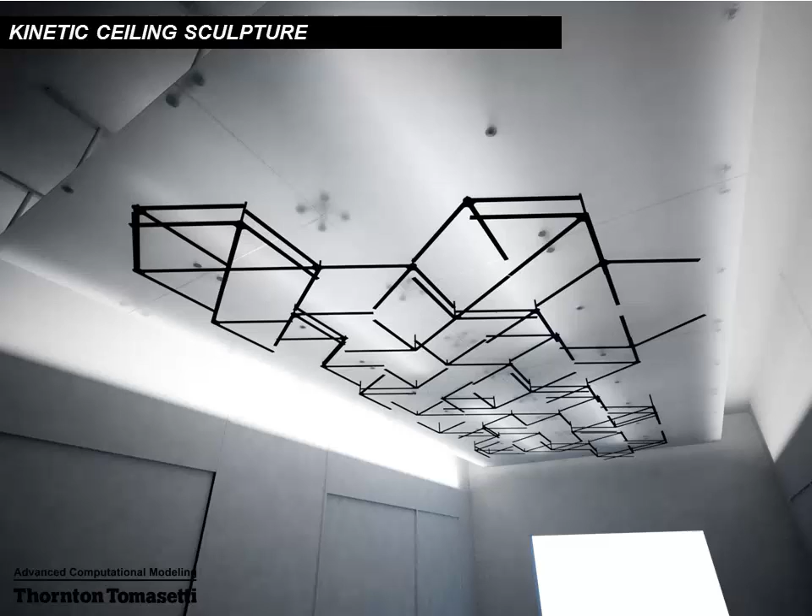I just got back from San Francisco this morning - we opened a new office there. We have our office opening party next week, and in the elevator lobby we installed a new ceiling sculpture that me and a colleague of mine, Justin Adone, who used to work in Chicago as well, designed and built in the last few days. This is a rendering, and this was last night when we had finally installed all the panels.

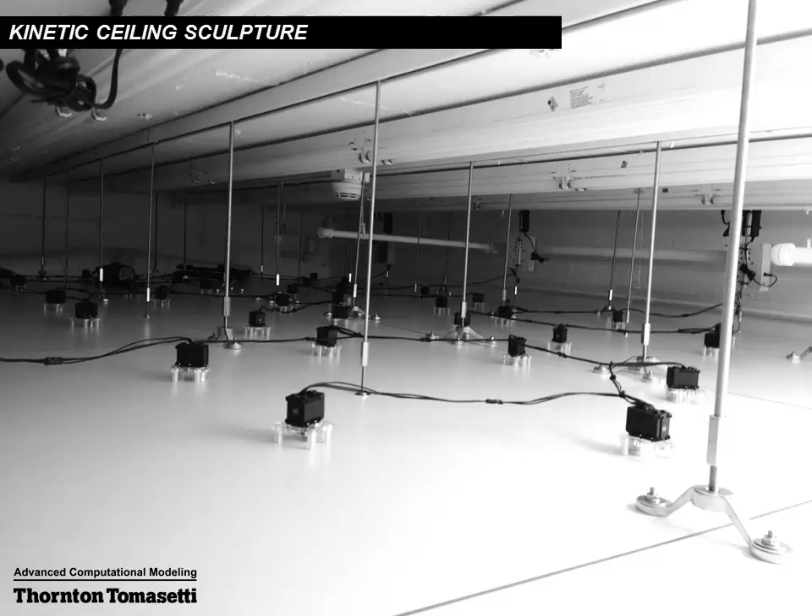It's pretty cool because it's a kinetic sculpture. We have these little arrays of servos sitting on top of the ceiling, reacting to people walking underneath and forming nice patterns when it's static or empty, but responding with chaos when people walk underneath. I haven't actually seen it work yet since I had to leave this morning early, but Justin uploaded the software after I left, so let's see how it turns out.

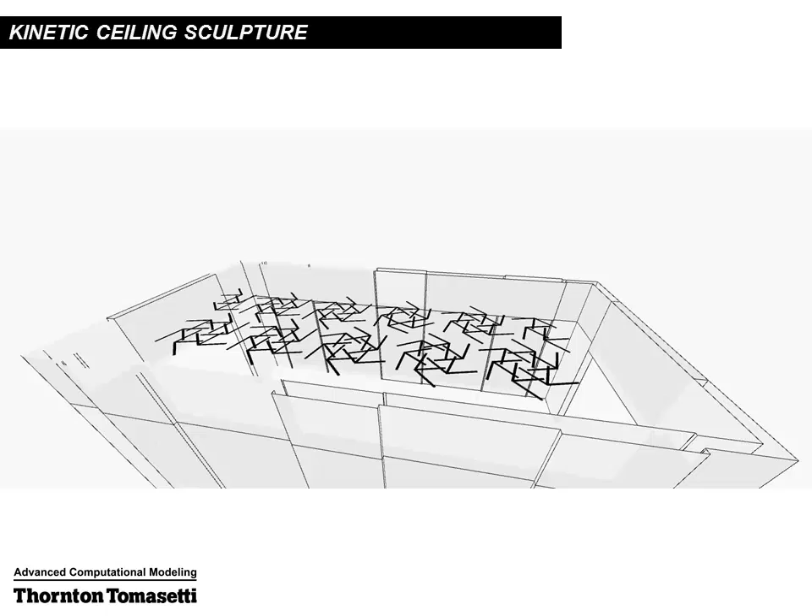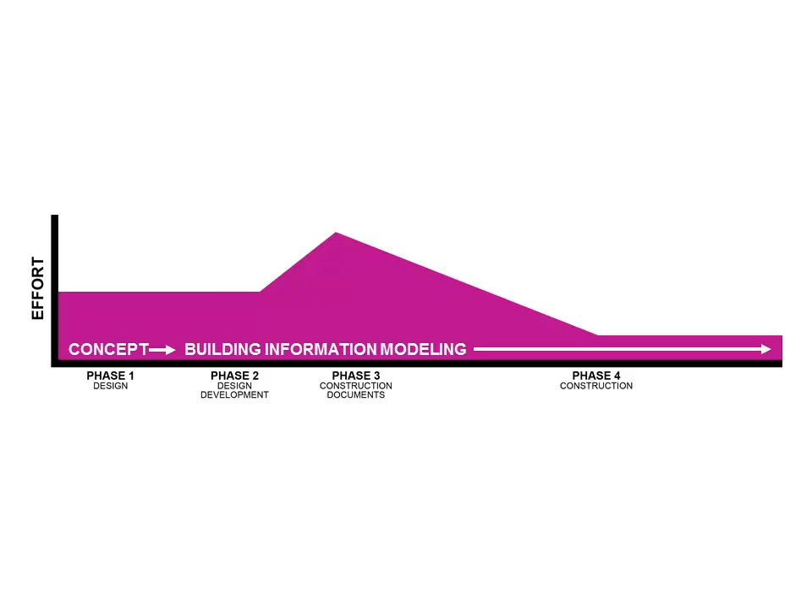ACM - the reason we started our group was because, as I mentioned with construction support services, we've been working a lot towards the later phases of the project. We've been really good with BIM and BIM to fabrication. But our focus is really to try and connect more with the architect at the schematic design phase, using smart computational tools and smart workflows to embed as much of our engineering knowledge into the design as early as possible.

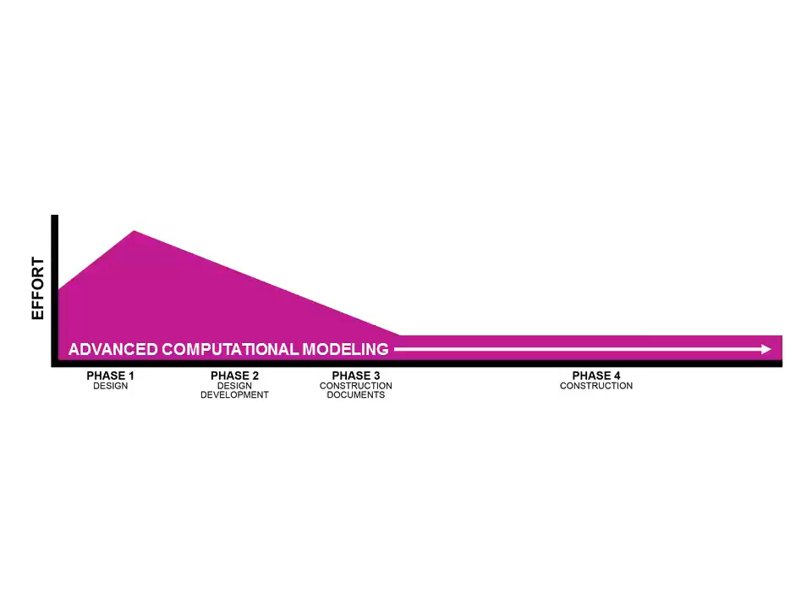I'll show one or two examples of what that means. This is the Culture Shed in the Hudson Yards area in New York. Diller Scofidio is designing this, and we are the structural as well as the facade engineers. It's essentially one big super truss, about 17 stories tall, with very large ETFE pillows - they're actually going to be the world's largest ETFE pillows when finished. This is a kinetic structure that moves, and the doors will open dynamically so it can transform into different kinds of exhibition spaces.

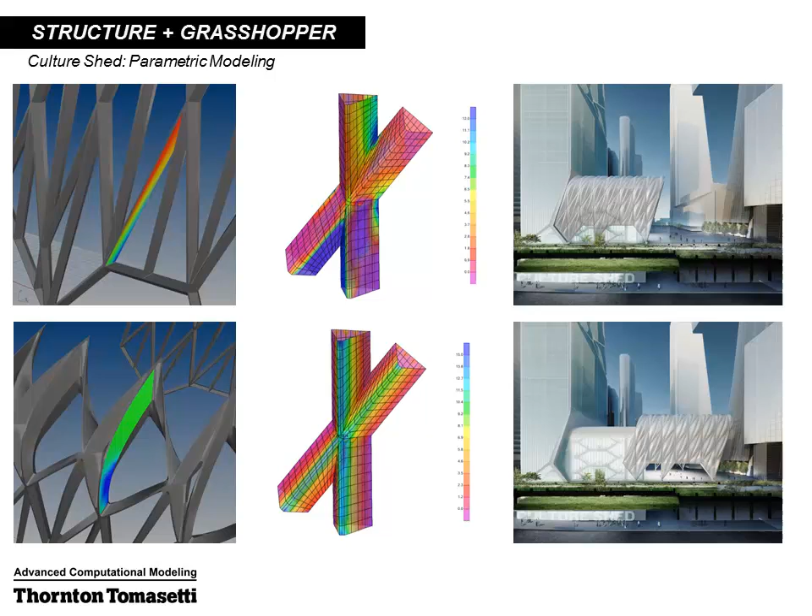And pretty early on, we were involved, kind of helping our structural engineers to maybe figure out some of the geometry, and just looking at steel warpage criteria and understanding, starting to talk to fabricators and understanding at what point does it get really expensive to fabricate this kind of steel, and how should we modify the geometry in order to avoid that. And then a lot of what our engineers are doing is already at the schematic design phase, running some finite element studies to understand the node forces, etc.

So there was this one point when we realized that the steel was too bent and it was going to be too expensive to fabricate. So we went back to the drawing board and over the course of a week just came up with all these different variations of that one idea of just using planar elements. So something like that, for example.

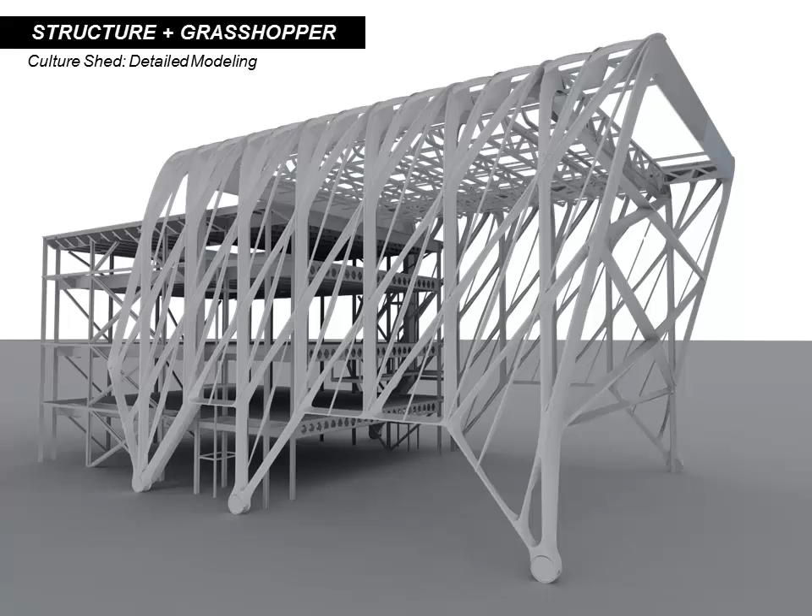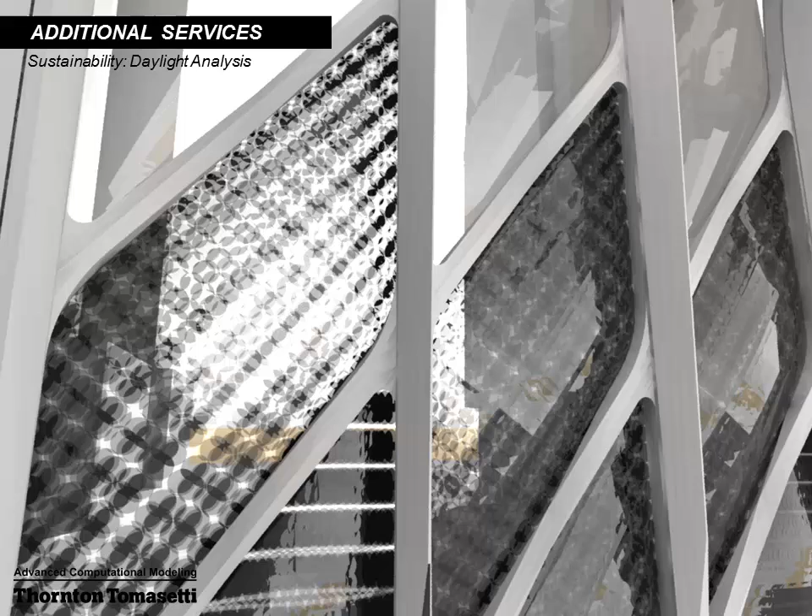So here, you can see we're also designing the kinetic structure itself. We actually hired somebody who used to work for a bridge design company, kind of specifically to do this. And as we're designing the structure, and this is really, I think, where maybe our group comes in handy in our firm, we're also designing the facade, and we're also designing the sustainability, kind of the facade frit pattern of this building.

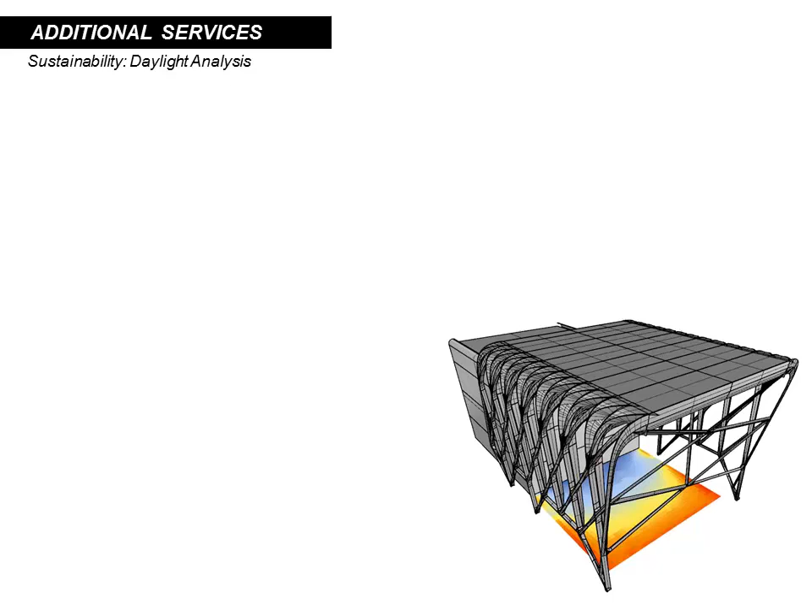So obviously, this being a translucent facade, there's going to be far too much heat gain, and so the architects were kind of interested in having a frit pattern limit some of the radiation falling into the space. So we used some of the tools that Mustafa will show in detail a bit later on, Ladybug and Honeybee, to understand how to design the frit pattern in order to limit the amount of radiation and still have a good amount of daylight falling into the space.

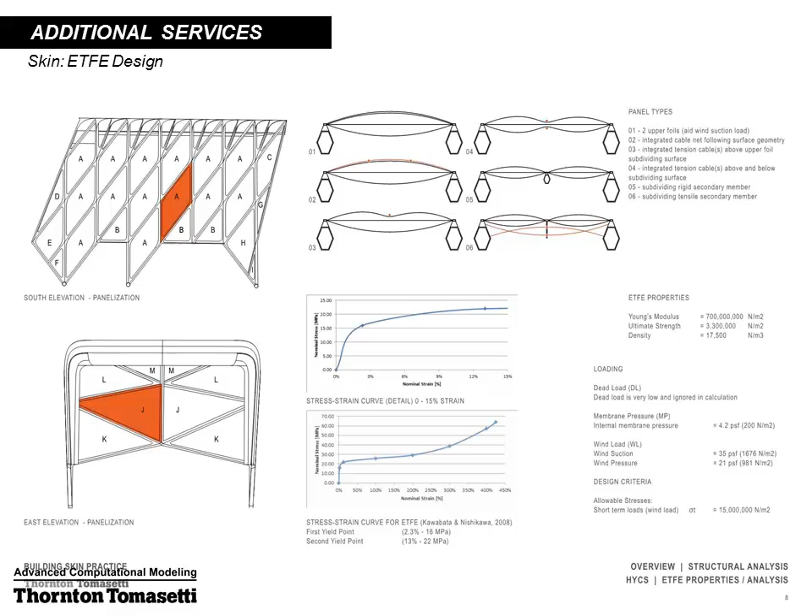And as I mentioned, as we're doing that, we're also designing the actual fabric itself. So it's a really interesting project from that perspective. It's kind of looking into fabrication of the steel, as well as frit pattern design, as well as kind of fabric design, just to give you an idea.

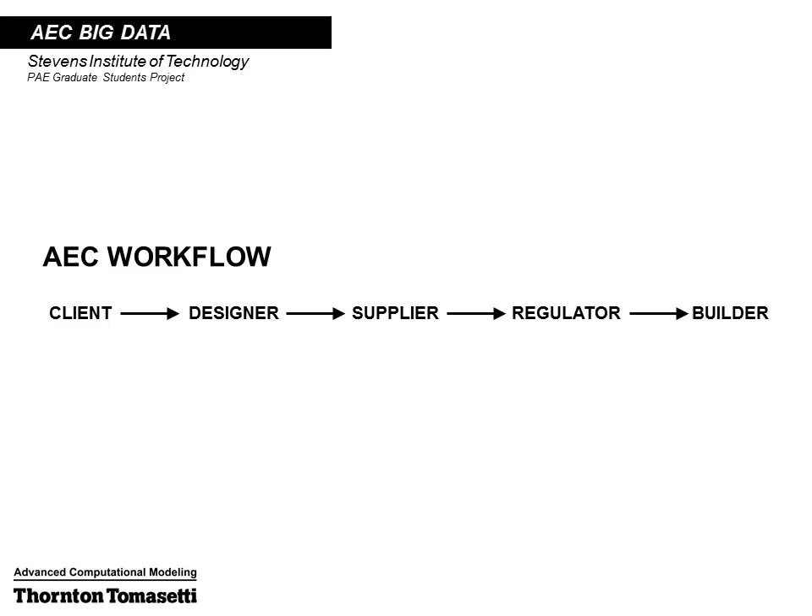And other than that, we're really kind of always looking at strategizing and optimizing workflows. So I want to show this - I don't usually show this, but this was some research that we did when we taught a class about a year ago at Stevens Institute in New Jersey with a friend of mine, Gregor Wilkner.

And the idea was, the problem statement for the students was: imagine we're in the future right now, it's like 2070 or so, 50 years from now, and we're running out of land to build on, so we're starting to build cities in the water, and we build these big floating pods. As the population grows, the demand for energy grows, and we need to build more energy plants on demand.

This was just a class concept, and we taught a lot of programming in this. And so we set up this kind of automated database in the cloud where we said, okay, what if the mayor would automatically request proposals and say, hey, we're reaching capacity, we're 80% full now with our demand, and we need more power plants.

And then that automated request would then just call a web hosted, or like a server hosted - in this case, we were using Grasshopper, just kind of a Grasshopper script that said, okay, I'm going to come up - every student would then just come up with a different way of designing these solar plants, and then it would upload all the designs.

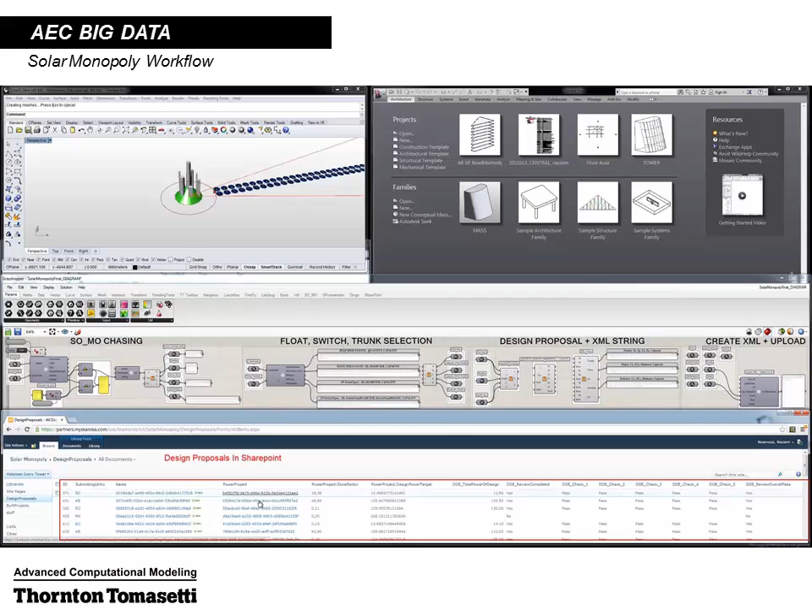Anyway, it was pretty difficult to show this in a video, but basically we did this on top of SharePoint, and basically all these different instances are talking to the same SharePoint database, kind of independently of one another. I'll skip this point.

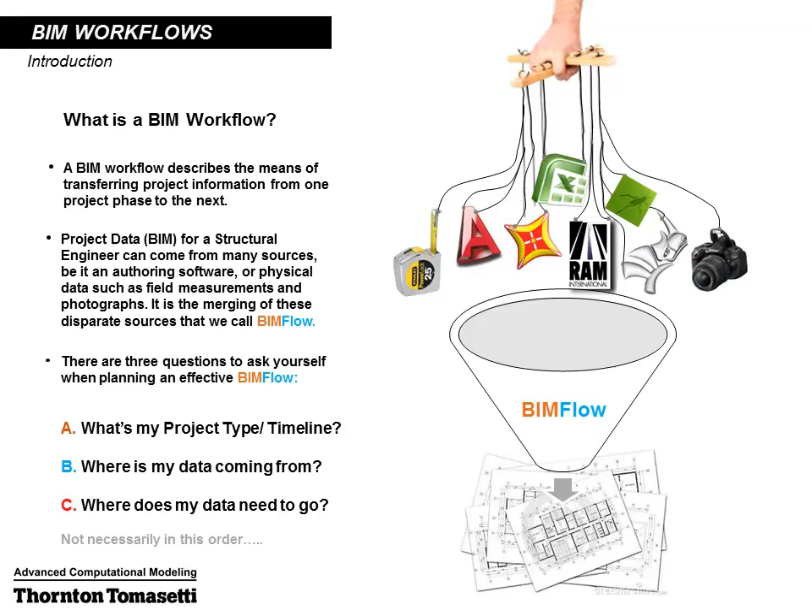So internally looking at BIM workflows, when people talk about BIM, they always just talk about Revit. We really think it's not just Revit - it can be any kind of information, really. It can be site photographs or hand sketches, or a lot of engineers use Excel.

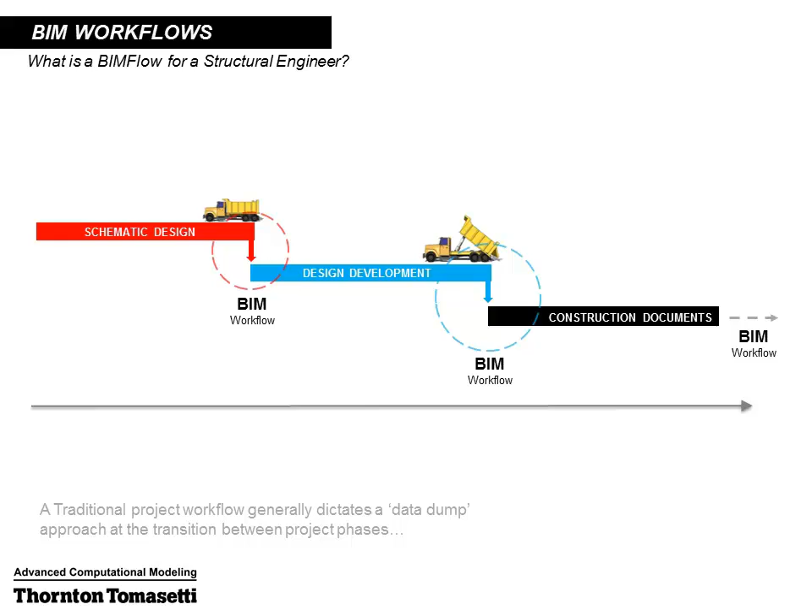So the typical project timeline is we go from SD to DD to CD, and typically what happens is there's always a problem at these intersections. We work until we have 5 sleepless nights before the deadline, and then we produce all this data and just dump it there and don't look at it again. A month later we pick up again from scratch and do that same thing again. So this is the effort curve where it's work like crazy, and then we don't touch it anymore until much later.

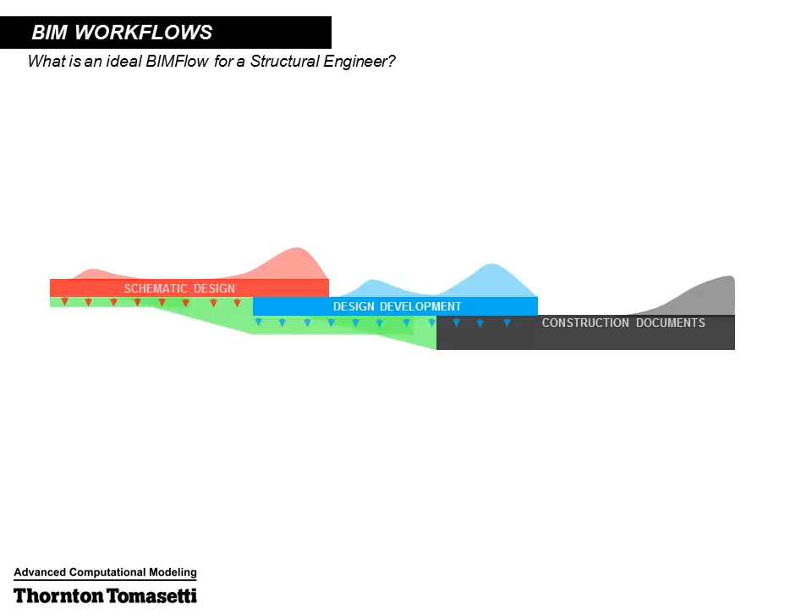In an ideal world, this would be a lot more linked, where all the information that we start to produce will just grow over time into this holistic database. If we just look at one phase at a time, design development for example, the ideal workflow would be fairly linear for us as engineers - the architect gives us geometry, or we generate the geometry, then we analyze it, and then we document it.

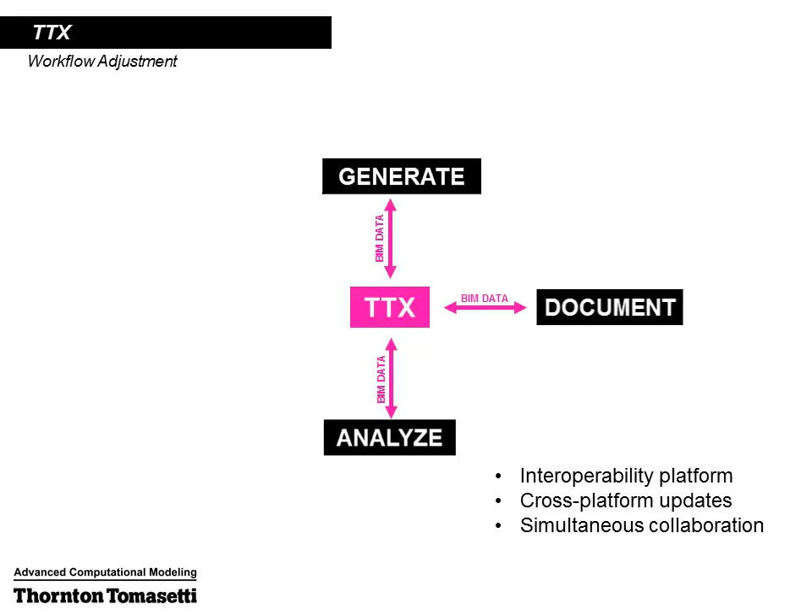So we don't like to treat this in a linear fashion. We like to think of this more as having a central independent file format. We call it TTX - we came up with our own. It's kind of, I want to say a lighter version of IFC, but it's pretty different actually. The idea is that we can talk to it from our 6 main structural analysis programs that we use.

So Grasshopper and Revit are in the mix, as well as Tekla for fabrication, and then also RAM, ETABS, and SAP currently for analysis. The idea is that you can start a project somewhere, then update the database, then read it somewhere else, make changes, and then update the database again, and update the first project.

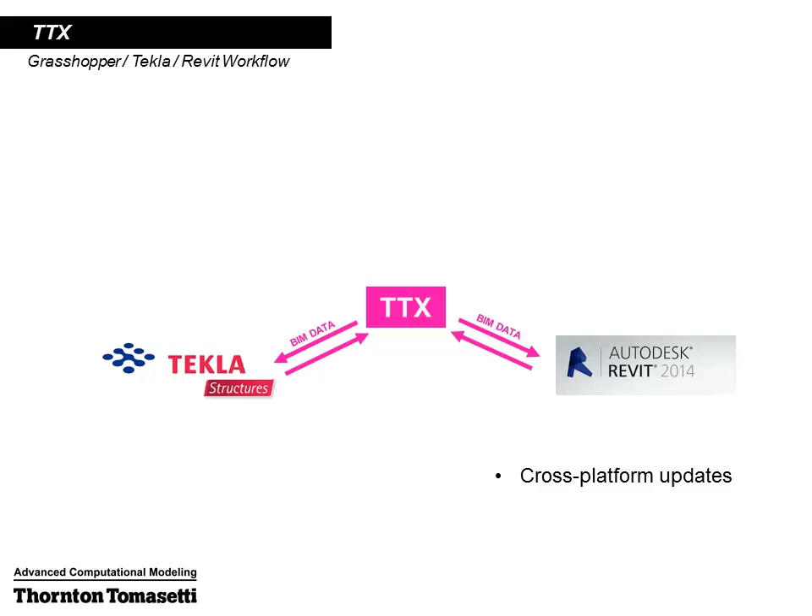So here we have a simple model in Revit, and we push it over into Tekla, going through TTX, and then in Tekla we make some changes, we add some elements, and then we can update the database again and later the model. It basically keeps track of the elements that have been added, removed, or changed, which is really powerful.

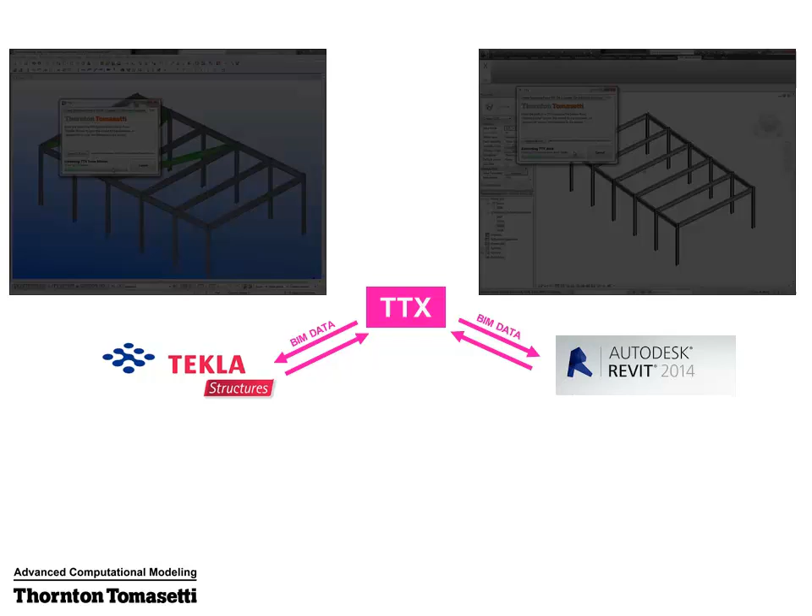So I think for the longest time we've always just had these one-way dumps of information going from one software to another. But then once you make a change, you can't update it anymore.

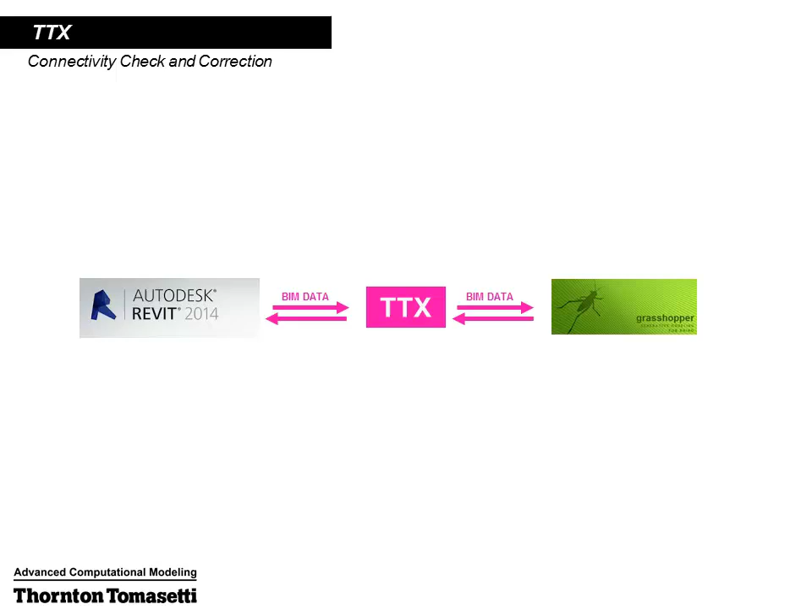So another piece of the workflow is where maybe we start something in Revit. In Revit, in most of these tools now, we have this kind of connectivity checking tool. The model may look good just the way the BIM modeler built it, but if you wanted to create a fabrication model or an analysis model from it, we would realize if we run it through this checking tool that some of the nodes are disconnected.

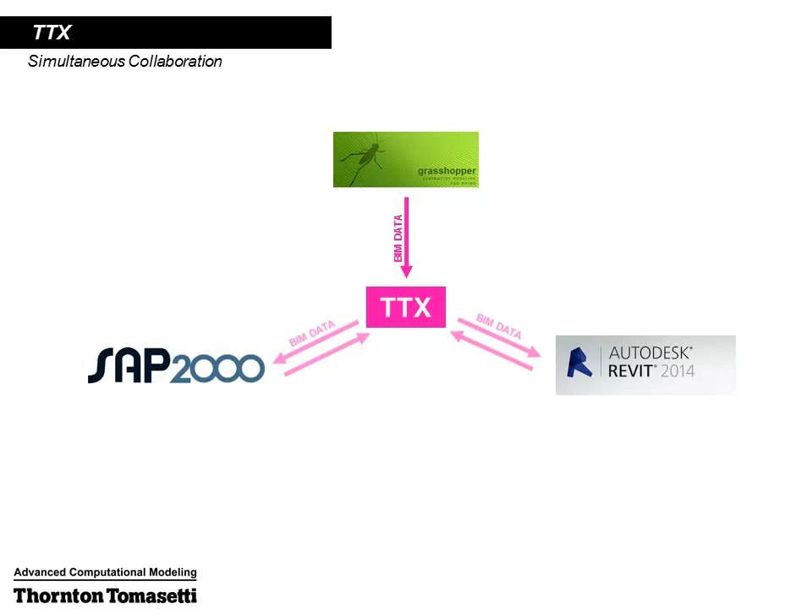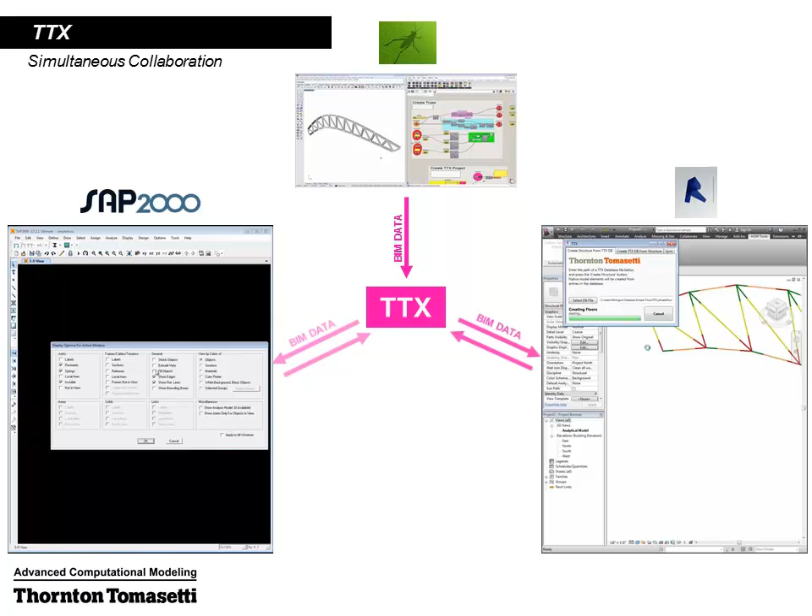And another example is where we start a model in one software, and then you go into 2 different packages in parallel and you do your thing, and then later on you sync them up again.

So in this case, we started a truss in Grasshopper, and then we pushed it through TTX into Revit and SAP. While we are laying out the documentation, the drawings and all the views, setting up all the sheets with the different tags inside of Revit, we're actually running the calculations and sizing all the elements, the real sizes, in SAP. So these were just dummy sizes when we brought it in from Grasshopper.

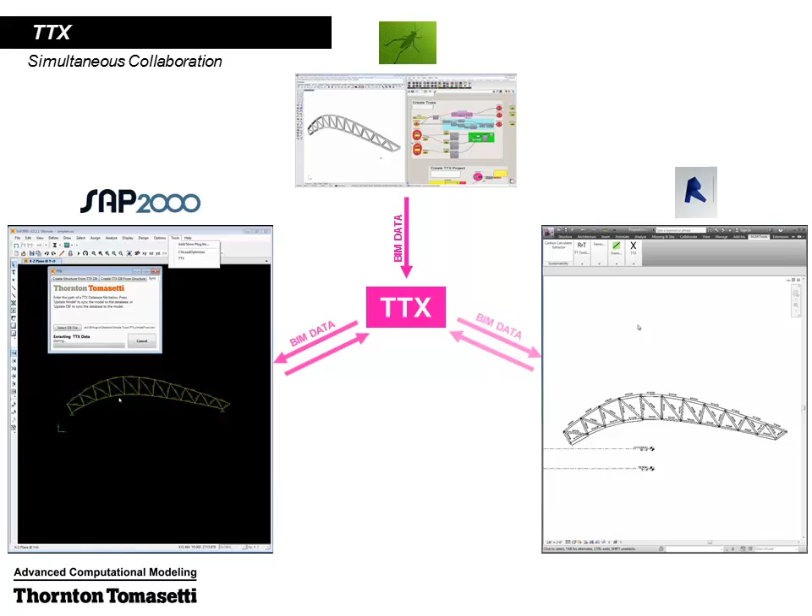The nice thing is that you can then later on just update the drawing. All the downstream information that is tagged onto the model, in this case the views and the tags, will update once the model updates. That's really powerful because it means we can take the documentation set and we don't have to redo it over and over just because something changed in the design process.

For the guys at Case, I'm sorry to bore you, I showed this already at Autodesk University. We were talking earlier that there has to be something new in this presentation since two months ago.

So two months ago, we also introduced the idea of TTX apps.

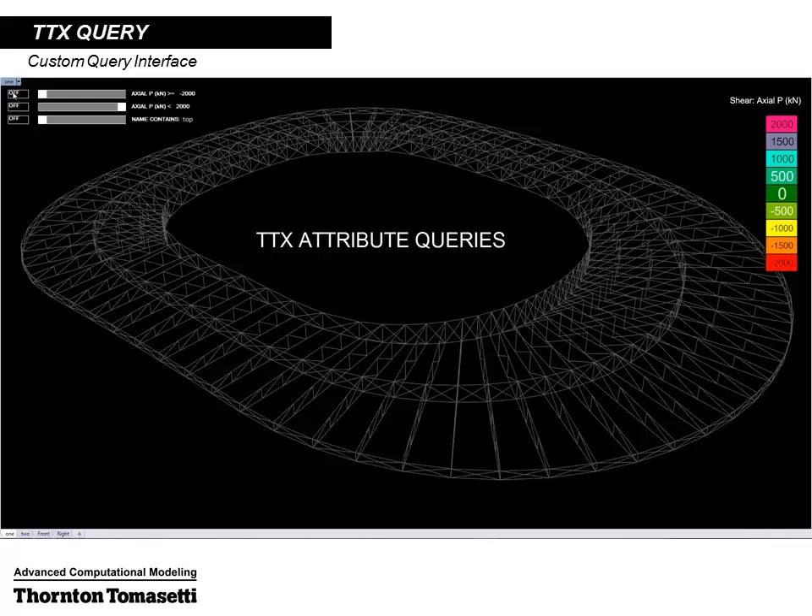So the nice thing about TTX is that it's built in a database. That means we can just keep growing it over time. As we are growing it over time, we can keep track of what happened in the past and what happens next. Also what's really nice is that it's not just a geometric or BIM database, but we also are actually transferring analysis data.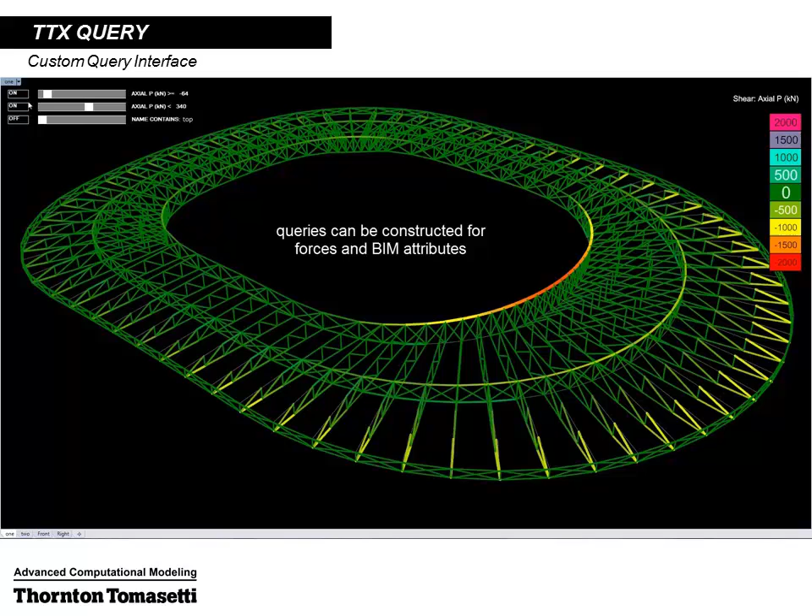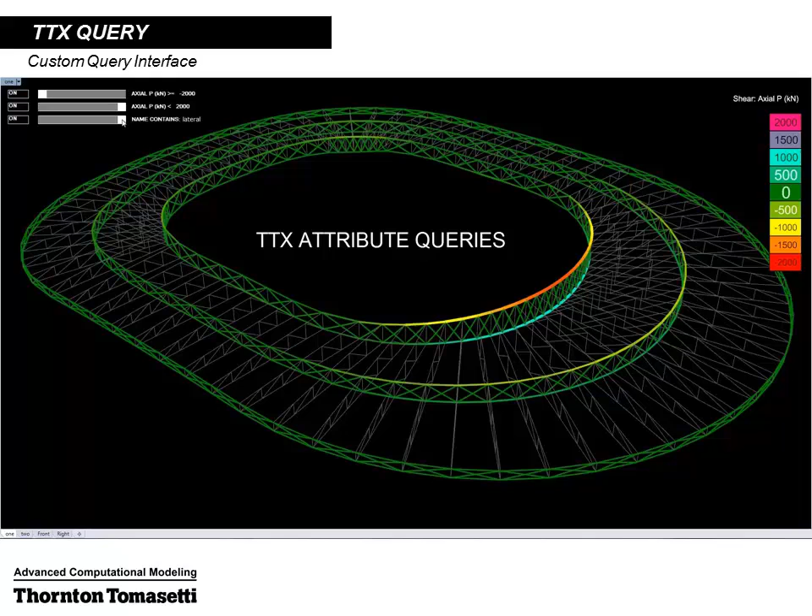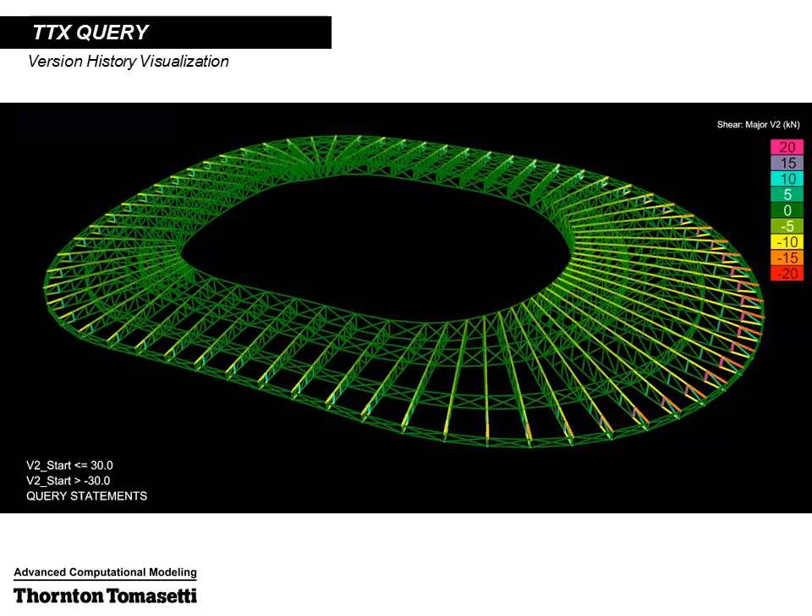We actually know all the stresses acting upon all the members and all the nodes. SAP or ETABS may be good to run the analysis, but they're not really good to create a report or let a structural engineer run through the whole model and understand what forces are acting on what members. So we created this query interface, currently in Grasshopper, where we can filter views and say, show me all the elements where the forces are greater than, say, 200 kilonewtons and smaller than something else. So it's in between a certain range, which is really powerful, and then we can zoom into the areas where we under-designed something and change the design.

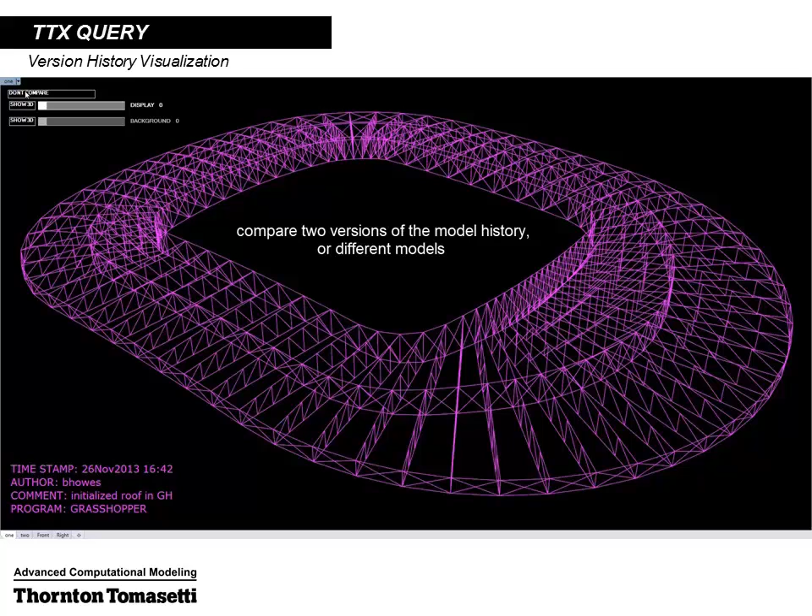Another really powerful feature is version history. We actually know... oh, it's not the right video, there it is. So we're kind of mimicking GitHub. For anybody familiar with programming, GitHub is a bit like Google Docs, an open source shared coding environment where you can start a project and somebody else can make a change, let you know what change they made, and then somebody else can change it again and upload the latest.

So basically, when we go through the different TTX revisions, we always record the timestamp, we record the author, we record a comment, so the author always has to say what they actually changed, and then we also record the program that made the change.

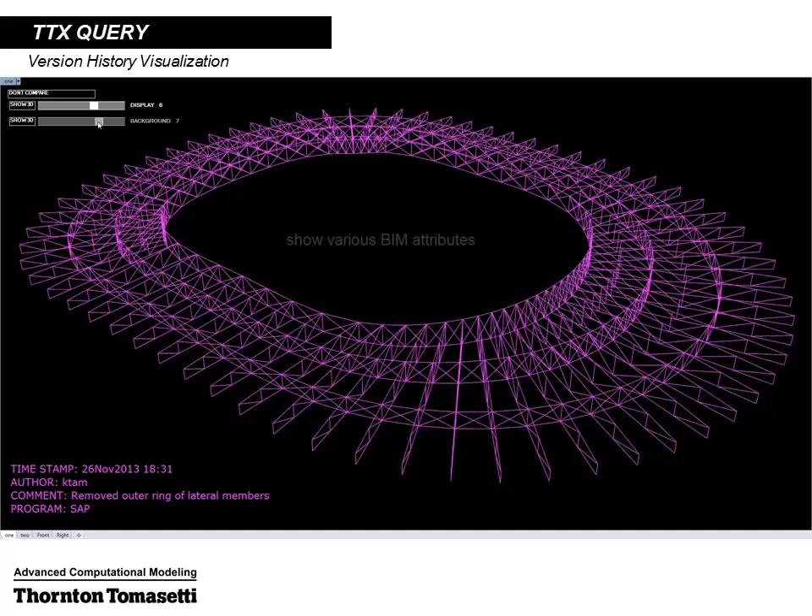That means we can later go back and look at this database of different project iteration instances and compare different instances. We can say, what happened between May 10th and May 30th? Or we could say, whatever we had in April was actually better than what we have now, so let's revert all our models and documents back to April. You can go back a couple of iterations, update all your models, and then all the drawings will be updated as well. It's really powerful because you're not just designing in one instance in time, but recording the whole history, and you can also compare notes in between.

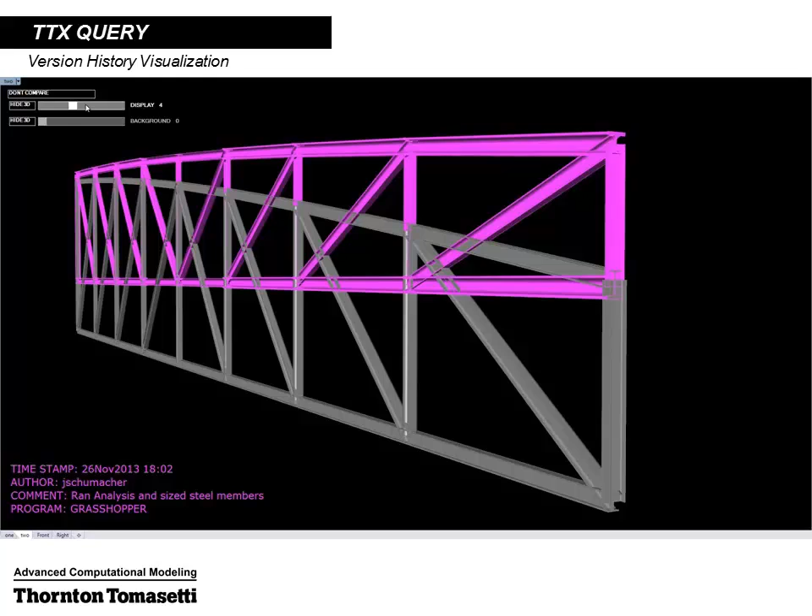Okay, so I'm going to press the button every 5 seconds. Yeah, you can do that.

This one is gone. So this is what I do in the office, basically. I'm part of the core, but I work with the sustainability team, the STEAM team. I do a lot of parametric environmental analysis, workflow development, and custom software development, in a way that we can help the workflow.

I also develop open source software for environmental analysis. Ladybug has been around for a year. These are all plugins for Grasshopper right now, but we're moving to other platforms too. Ladybug has been around for a year now. It does the weather data analysis.

Honeybee, that logo is old. Honeybee is not yellow, I'm sorry. Now it's brown, but Honeybee does run daylighting and energy simulation.

And I'm working with Penn State University. I want to make sure everybody heard Penn State, because I said something and somebody thought I said NSA. No, Penn State. So I'm working with Penn State University on an open source project that we call Butterfly, which will make you able to run outdoor CFD analysis.

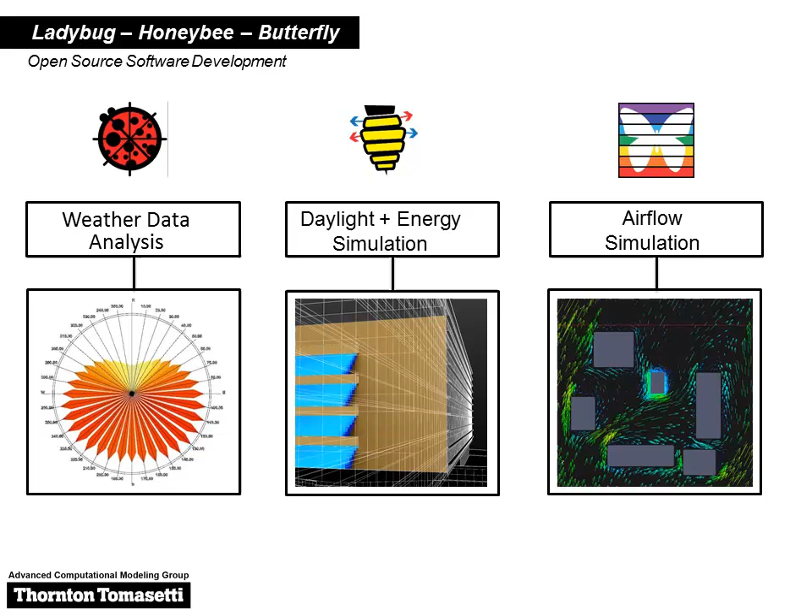So this is the dream: you have design, evaluation, optimization, and you go next.

Okay, we do all this stuff, right? When I say as an engineer, I feel weird because last year, if you met me here, I was an architect. So as an engineer, the question is, okay, you're doing all this stuff, it's cool, we're trying to help our workflow inside, but what are we doing for the industry, or how can we think of moving the industry more than just doing stuff in-house?

And then it comes to the point where you think, okay, if we want to make a difference, we should try to move the whole industry together. And then the question is how we can move the whole industry together. It's just like, okay, we should start helping architects and designers get into what we think, so we can do it together more.

When I released Ladybug, the idea was, okay, make radiation analysis as simple as everybody can run it, so radiation analysis is not going to be a big question anymore. So next time they come here, you can talk about daylighting, because radiation is done, it's simple, it's not that hard. You can start educating yourself with that.

And next, I just released Honeybee, and we're doing workshops here. I hope next time we talk, people know the basics of daylighting, so we can go talk about energy. Next time we can talk about controls, we can talk about real optimization, in a way that everybody knows what we're talking about.

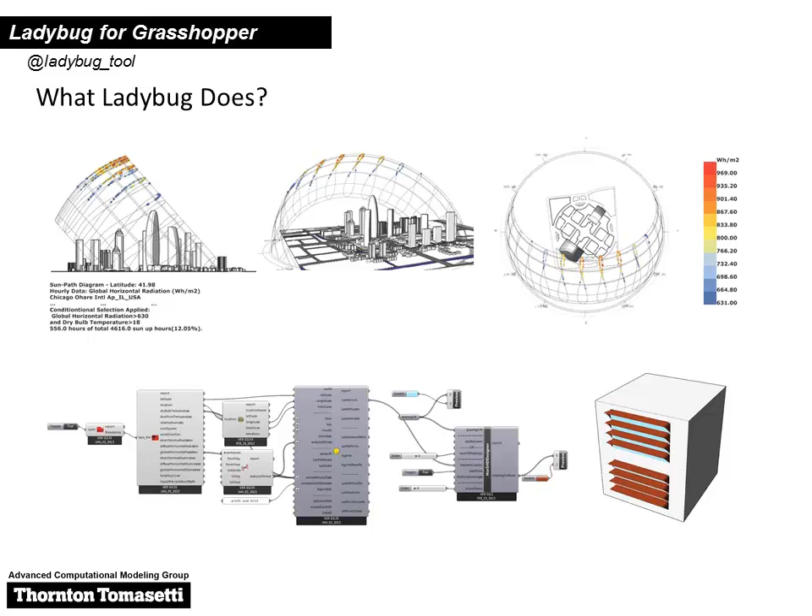Radiation rose. This one hopefully is going to replace those cubes that everybody runs radiation analysis with and say on the south is red, on the north is blue. Yeah, we know that. So this one basically shows how much radiation you get from different directions, and now you can integrate it with your site.

So if you have multiple buildings and you're starting to design, let's say this circle is your radiation budget for your building, coming from an engineer who tells you this is the radiation budget we can get on this facade if we want to meet this number for heating and cooling. You can look around the place and see how you're doing right now and what strategy is going to be different. So before even drawing the line, you get some ideas about how you want to design.

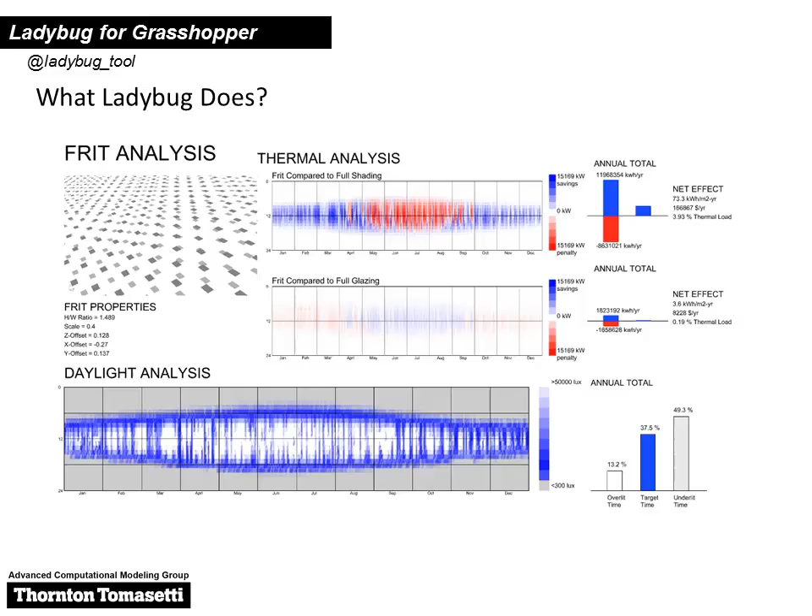Next one is some kind of stuff that I didn't think people would do, but they're doing it. They use the Ladybug components to do visualization inside Grasshopper. This is the work of Chris Mackey when he was an intern at TT. And yeah, definitely you can do the colorful stuff too, if you want.

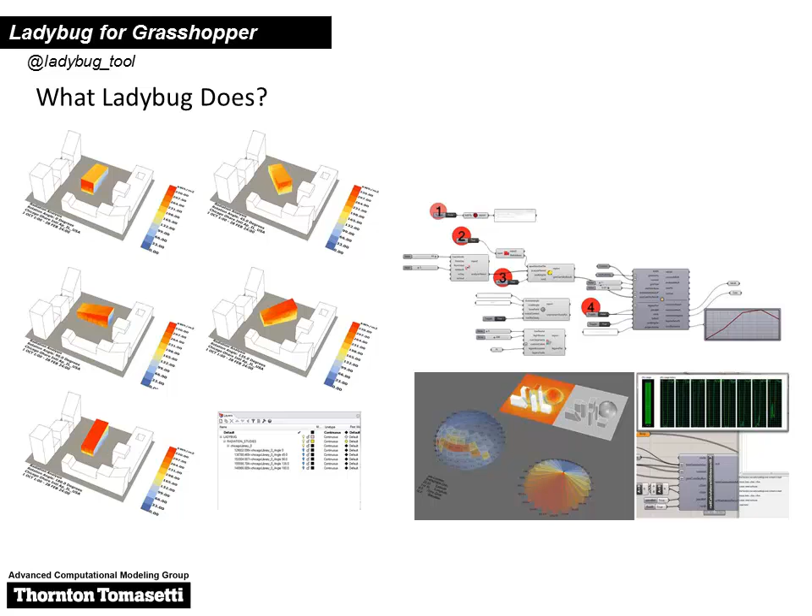But then I was thinking, okay, now this thing has been around, maybe something at the next level would let you run energy and daylighting simulation. I was calling it Honeybee, and it's supposed to be there, but it started to have even more components than Ladybug, so we just moved it over. This part is not available, which is EnergyPlus and OpenStudio, but for the rest, you can go ahead, it's on GitHub.

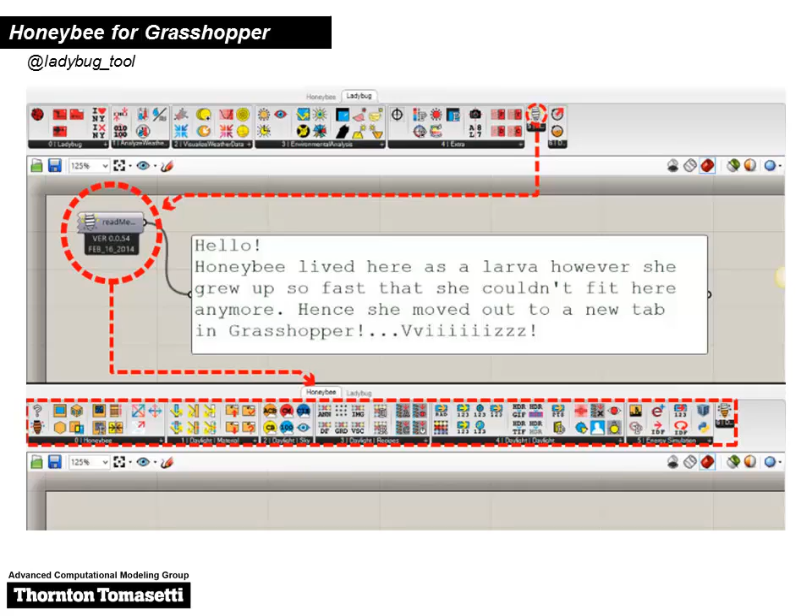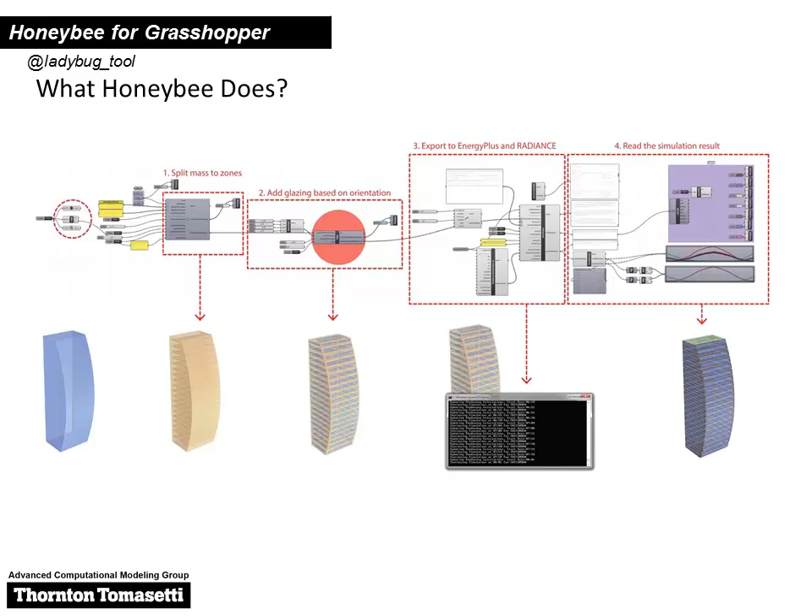You run the energy simulation and bring the model back to visualize the result. If you go next, the other thing it does - the version you have out right now is running stuff like radiance, shadow studies, things that in this industry people still talk about like magic.

You know, it's so simple - everybody should be able to do that. I think we shouldn't get any contract to do this for designers. You should do it. You should have a better question for us, so we can work together.

There are components where you can watch the sky, there are some components for glare analysis. I made basically Honeybee right now.

If you know how to use it, you can do really advanced stuff. But I made it hard in a way that if you don't really know DaySim, you will just get errors and warnings, so you can't really run it. I'm taking care of that as far as I can, but I know you'll find a way.

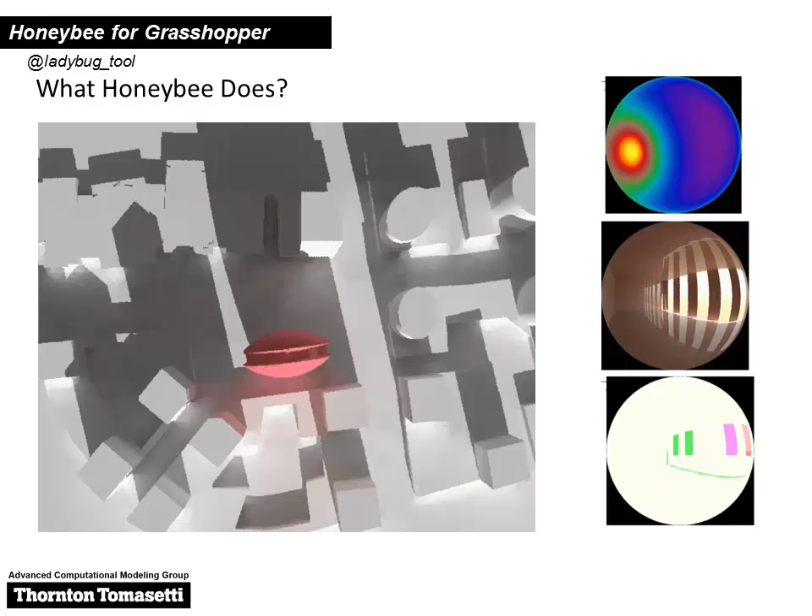This is another example - if you get Honeybee and know how to use it - this is actually a real project we're doing at TT. I used similar components to run a parametric analysis for the glass type. This is just a single slide to show what you can do.

This is another example of how I changed the workflow to work for designers. Many of you probably know about annual daylighting simulation. When you run it, the values you get are usually for the annual space - for example, they say daylight autonomy of this space for 300 lux is 65%.

And you say, okay, what does it mean? It means that for 65% of the time you get enough daylight in this space for these test points, or whatever you have. Then you ask, is it good? And someone says, oh, this is normal, but we want to get to 75%, and you're the designer.

And I'm like, okay, what should I do? They just say 75 versus 65, make it 75. And you're like, okay, but what should I do? As a designer, you can't really follow and see why this is 65 versus 75, or what's happening here.

So this is a simple component that lets you go through the result for every hour of the year. At some point you think, why am I getting 65% versus 75%? Is it the window size? Is it happening for all sides of my building? Is the problem during summer or during winter?

It gives you these options of going deeper, because you already ran all this annual analysis - why shouldn't you have access to the data for each hour? Again, when you talk about it, it's so simple, but when you use it, it just changes the way you work.

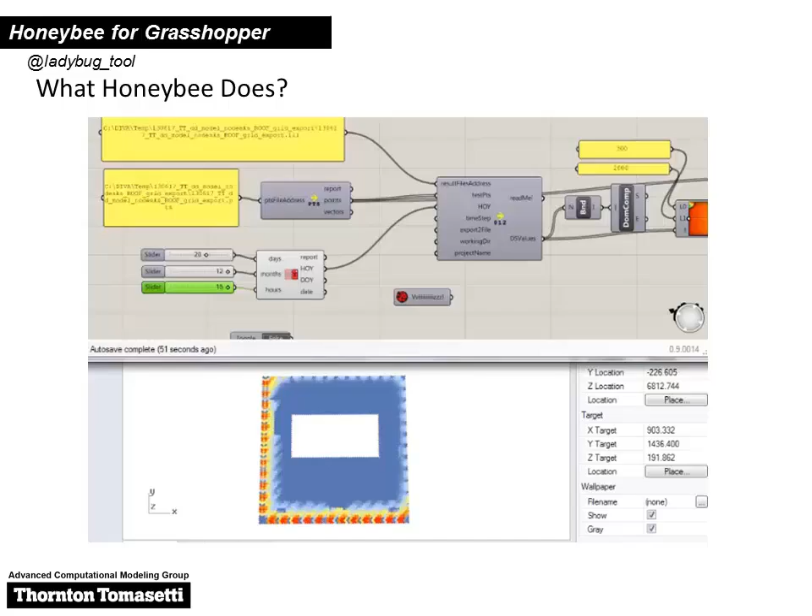So what you see here is a dynamic blind simulation. The client had the question of whether they should use the dynamic blind or not, and whether it would be helpful. So we used DaySim through Honeybee to basically simulate the effect of using the blind.

What's important for the dynamic blind is you should be able to predict the behavior of the user - first, to know when they're bringing the blinds down and when the blind goes up, and then find that relationship with the lighting inside the space, so you can potentially use DaySim to say how much electrical use you will have.

It doesn't calculate the right electrical use, but it's really helpful. I think to run something like this in earlier stages of design, to be able to visualize it like this for the designer, is really helpful to just spark the discussions.

We know you just press play, and we know that not everyone is good at using Grasshopper and Rhino. However, we started with that. Now Dynamo is taking over, and I used it 6-7 months ago, and we opened it up in the office to check it out. I said no, I'm not gonna use it. Then I checked it again later on, and it really works.

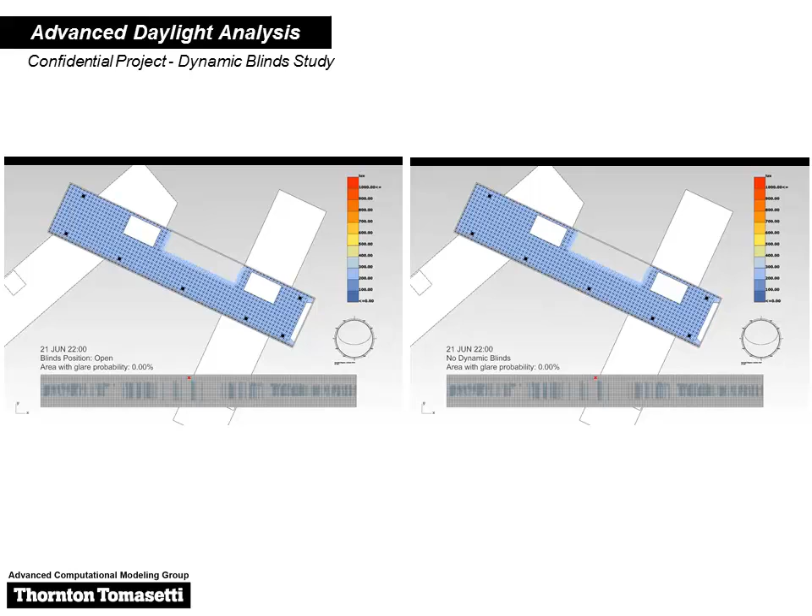Now that it really works, they have Green Building Studio as the backend, which runs on top of DOE2. So what we're trying to do is something similar to Honeybee for Grasshopper, but this time it's happening for Dynamo and Revit.

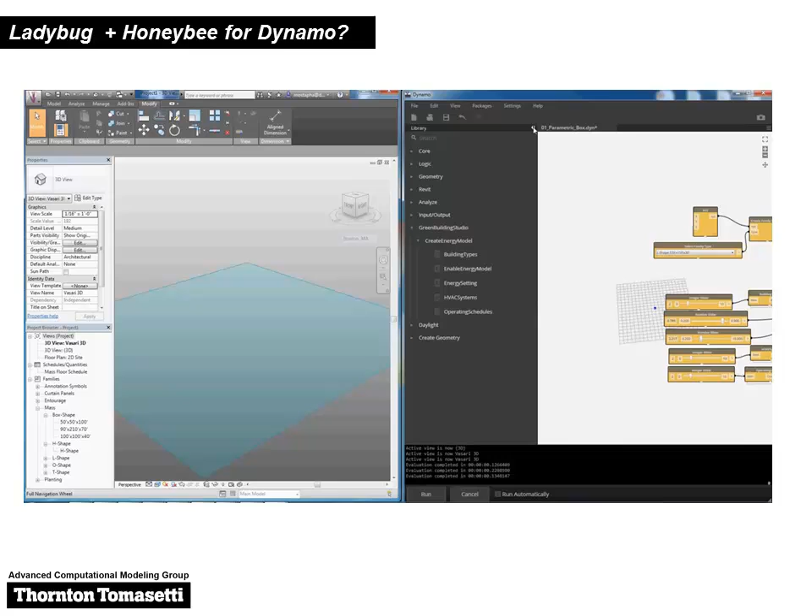So that's the family, I'm changing the floor height. It's similar to what you can do - you can just bring your family and then set up the parameters that you want for your energy model. They call it energy setting in Vasari Revit.

You can change the glazing percentage, change the shading depths, change the HVAC system that they have, and all that stuff. If you want, you can change the schedule, then set it to true, and it gives you the energy model.

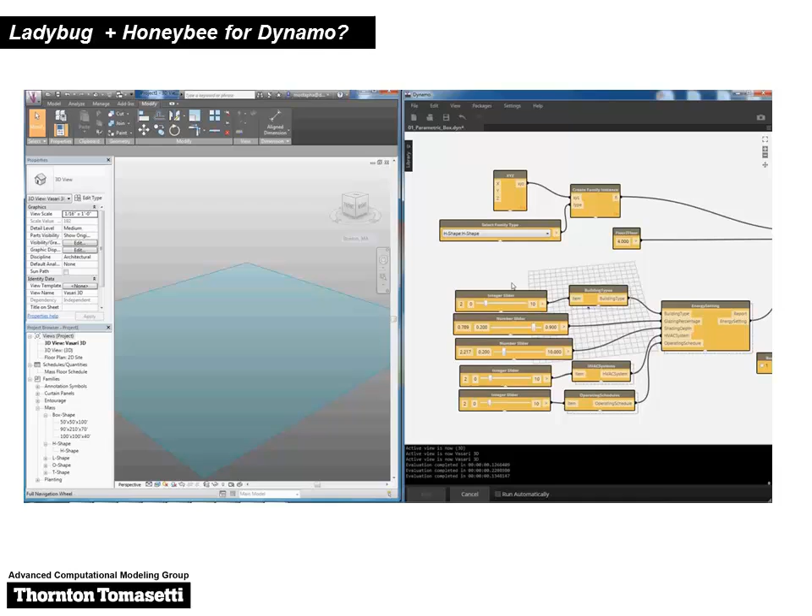And you can write the GBXML file, send it there, run the analysis, get the result back. We haven't worked on getting the result back yet - this is basically the work of an afternoon or so to chase the job.

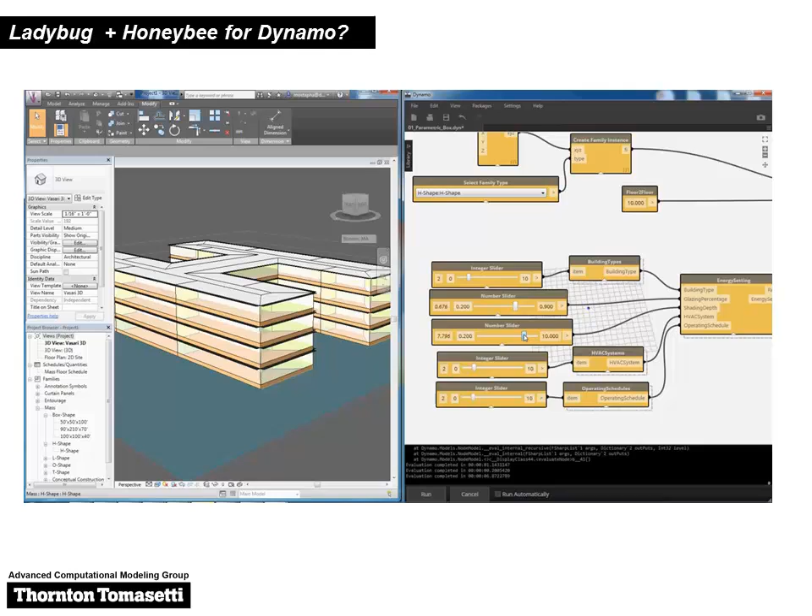But then it comes back - okay, I ran all this analysis, I have 2 gigs of data. Awesome, what to do with it? I have no idea, so that's the problem. You get all this data - which kind of data do you want to use? What's the use of that? And if you're really, really good, you can modify your design based on the energy analysis or daylighting analysis or any analytic analysis, and then come up with a new idea that works better.

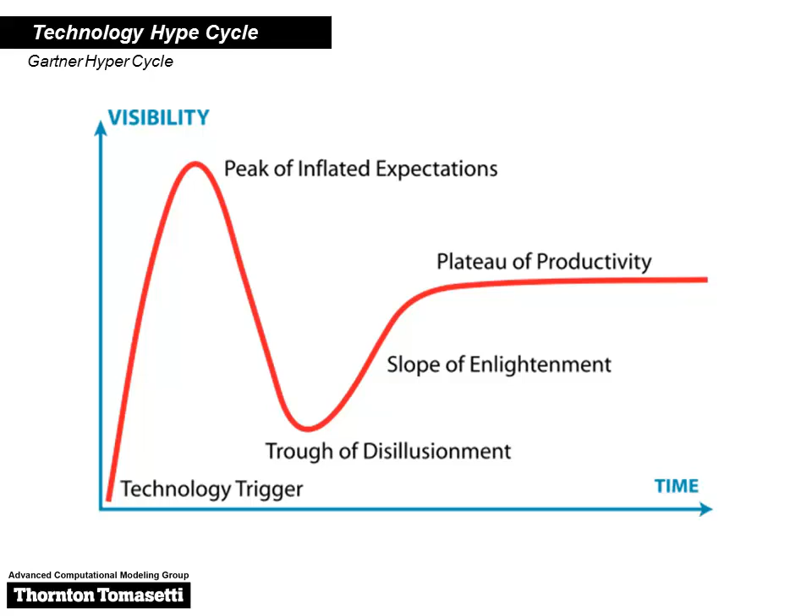It comes here, and from this line it drops down. So the question is how we can push it forward. We think the answer is support - how we can use this computation environment we develop, this collaboration, and support the designers through this process without blocking them from what they want to know. This is what we call remote solving.

About 2.5 years ago, we started this. At the point it was a research project we did with LMN Tech Studio up in Seattle. The idea was that more and more of us are starting to use the same platform - this was really based on Grasshopper. I gave a presentation, they gave a presentation, and we realized we can do the same stuff as architects and engineers. We went to the bar, and after 2 beers came up with this idea that we call remote solving - what if we set up that kind of computational project or workflow in a cloud somewhere where all parties can have access.

For example, architects can have access to the design inputs, and then engineers and contractors can give feedback. Over time, based on the feedback, the analysis, or the varying design inputs, they can make changes to the computational model. So it's really the same thing that happens in a project - week after week we get new drawings, the design changes, and we have to get feedback.

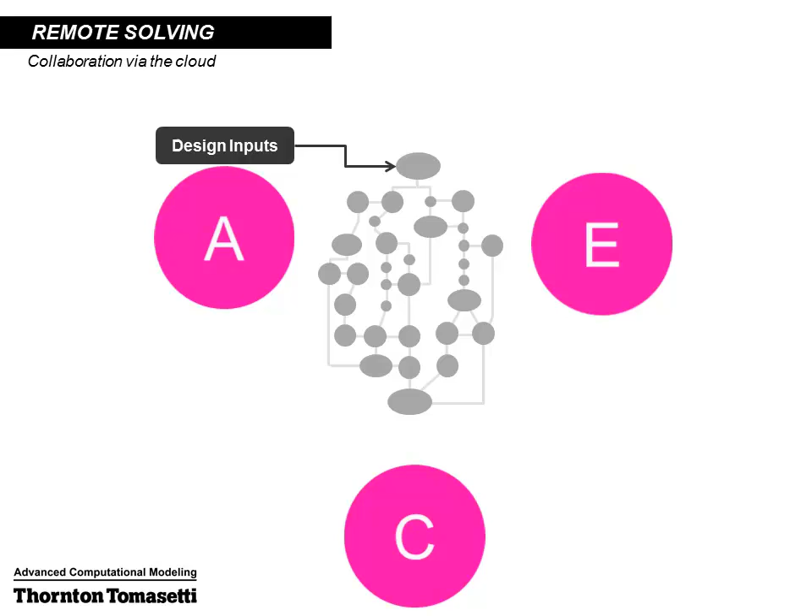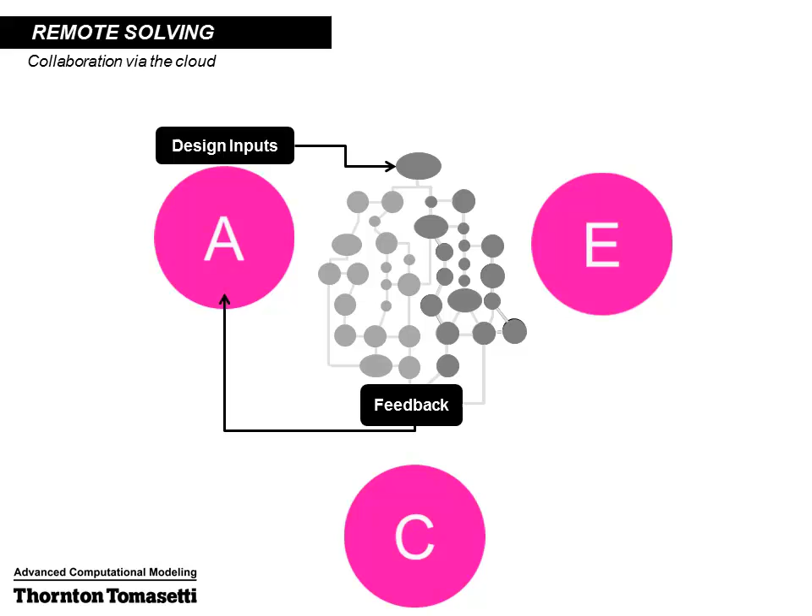But this just happens in the cloud, and it's a lot faster than having these 2-week increments where the architect gives us something in a DWG file, but we'd like a 3D model. When they give us a 3D model, the connections don't work, so we have to rebuild it. So let's just set it up so that whatever modifications they make to the geometry, it's already set up for analysis as well.

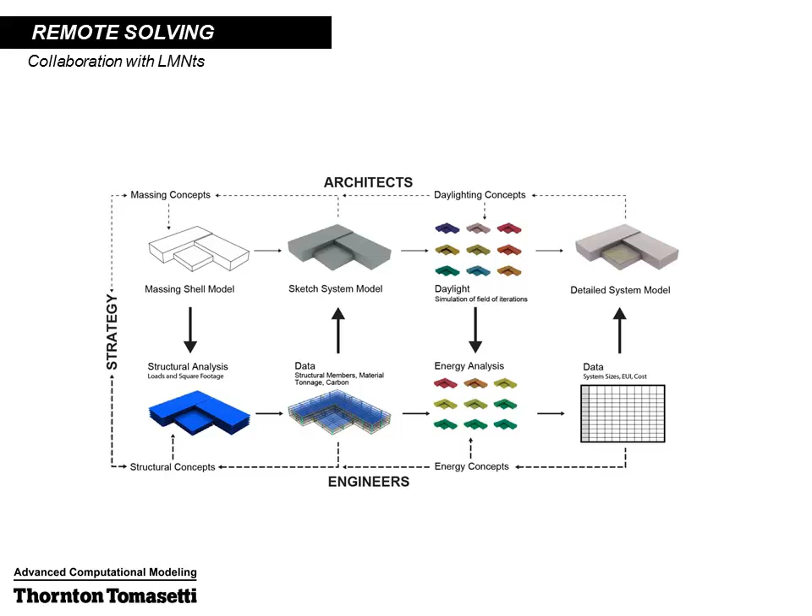Here's a nice diagram we made with LMNts. If we start in the top left corner - the schematic design phase again - the architect just starts with the massing model, then gives that to the structural engineer. This is kind of the ideal workflow. They lay out maybe the grids and then the columns and beams, and calculate all the sizes.

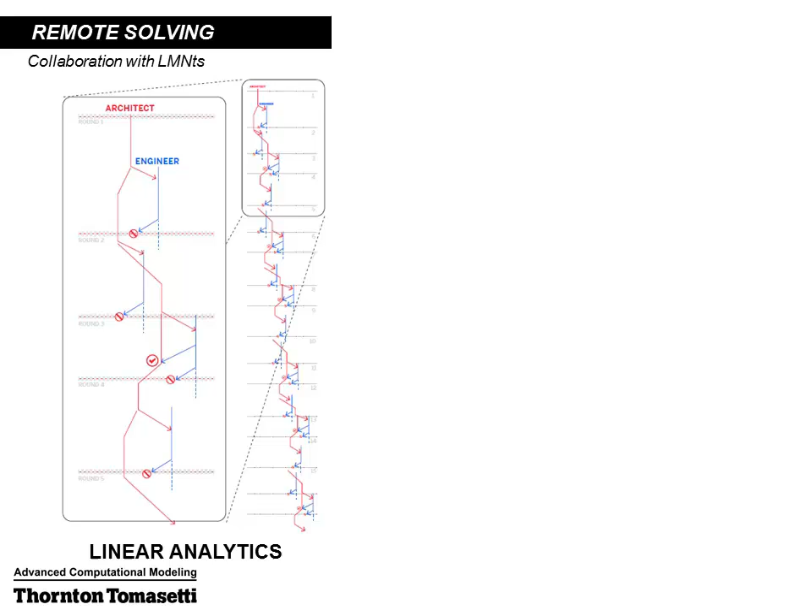Based on beam depths, based on the ceiling depths, they can then run daylight studies, and then give it to an energy consultant or mechanical engineer to run an energy analysis. Ideally all of this happens - structure informs daylight, informs energy, informs the overall building - in one design iteration over the course of one afternoon or one hour. But it never really happens because we aren't organized enough.

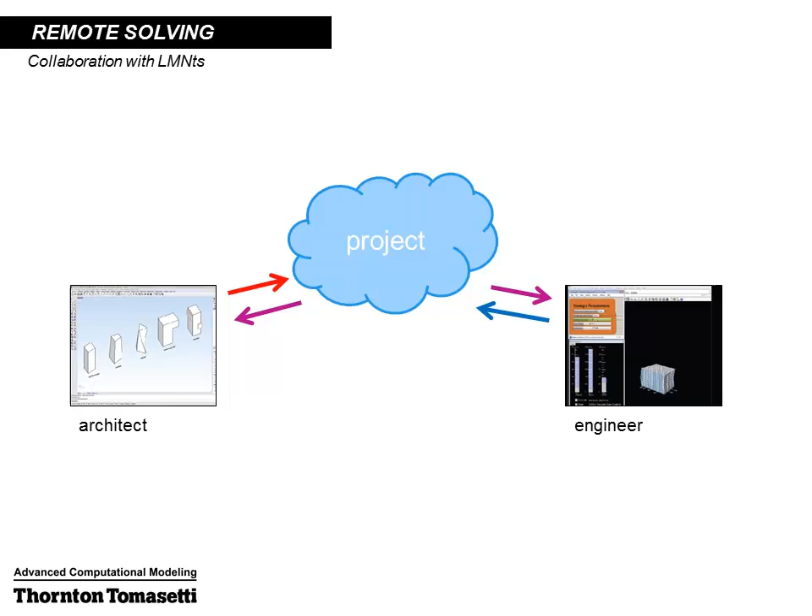So what we do is more of a linear workflow where we're given an iteration, and by the time we're done processing it, the design has already changed, so we don't really have that much of an impact as engineers in the schematic design phase. But ideally we'd be working much more hand in hand.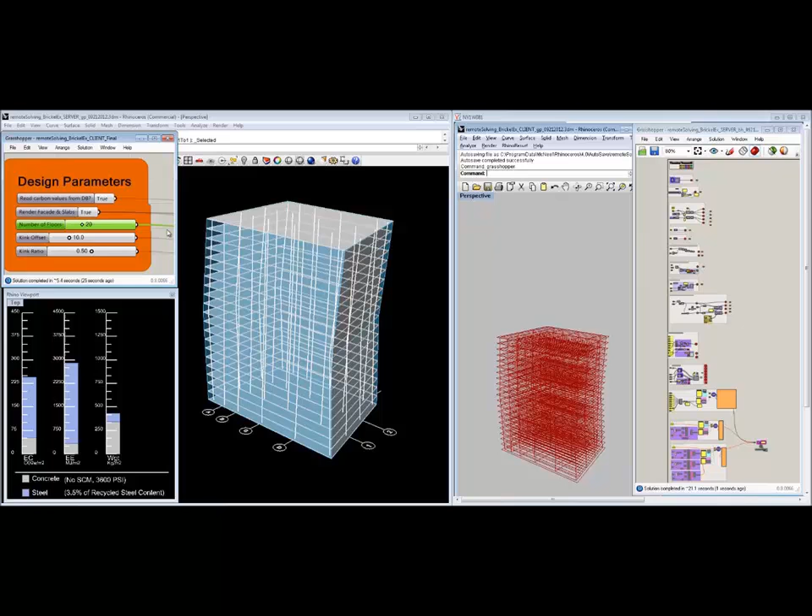So it's kind of pretty simple. Like I said, this was a proof of concept where the architects are controlling the master model, and we have a server set up somewhere, and basically it just writes the geometry. Every time the geometry changes, it updates the database on the server, and then our Grasshopper model is running in the cloud, reading the latest geometric information.

It's running the structural analysis, sizing all the columns and beams, and also calculating embodied carbon in this case, and giving back that information. So the architect can instantly understand what kind of impact that current design iteration has based on embodied carbon or embedded energy. This takes like a couple of minutes or so to go back and forth.

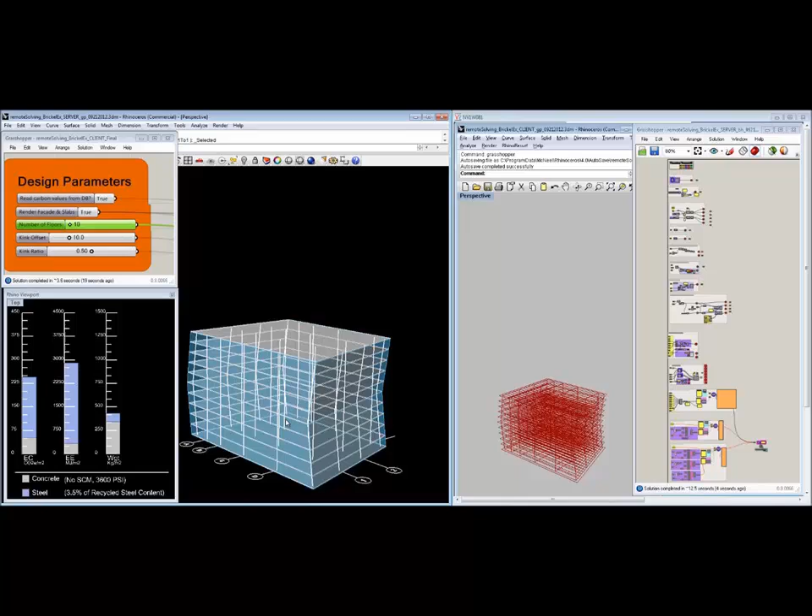Do you want to do this? And then we started getting another project because this is a real project.

This was about 2.5 years ago, and we've presented that idea many times.

The question was what type of frit pattern we want to use. They had a big image in mind, like, we want to look this versus that, which one is a better idea. So the typical workflow is I go and say, send me your ideas that you have, I'll run something for you, I'll give you a report, then we can talk about it. If you want to change it, send me another one and we go over it. If you want to send me ten, it's up to you. But then we sat down and said, why should we do that?

Why just go and use remote solving? We know what the problem is, we already talked to each other about that. We know what the limitations are, and we know your language, you know our language. So we take over the part of analysis and automate that for you.

You give me an image for making all this stuff, just upload it to my Dropbox. So we had a folder shared on Dropbox, and the idea was these are the images that you want, this is the structure of putting the image. For each facade, put this image, and this is the name. And then you say go.

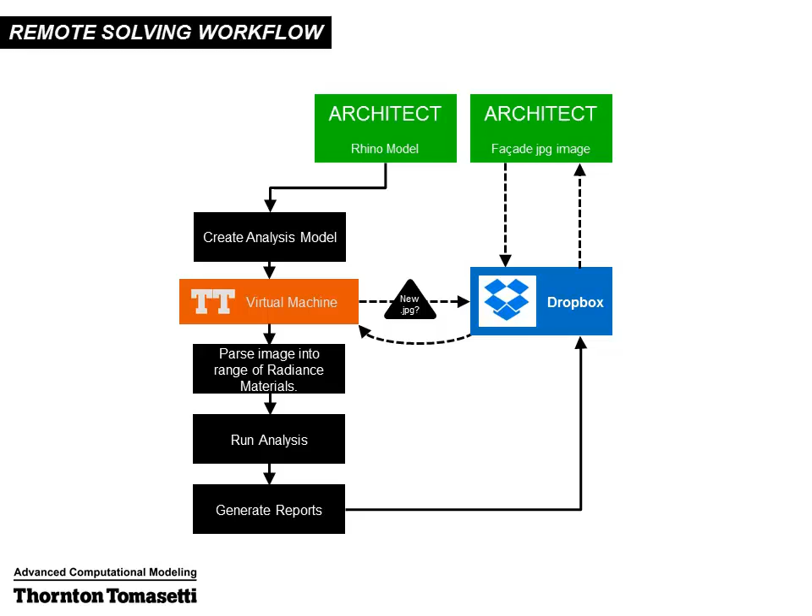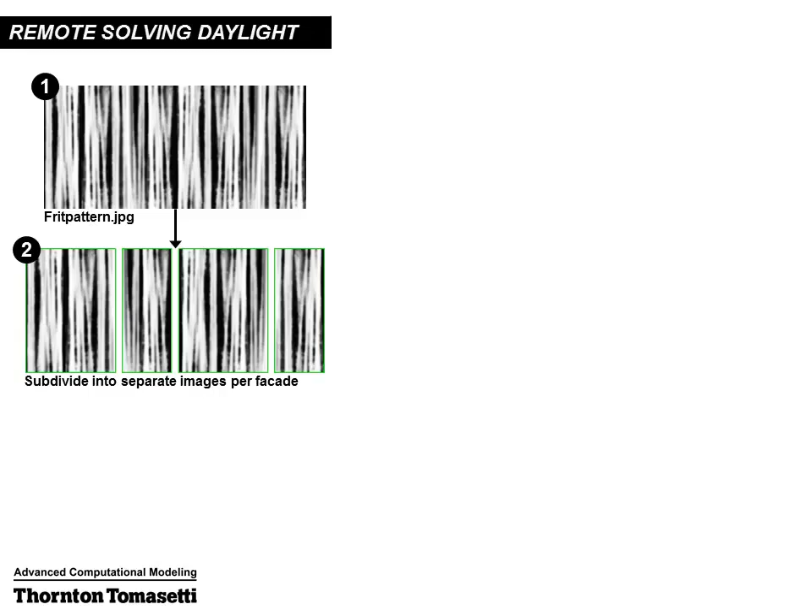When it says go, it comes into our system, and we get the images, push them all around the building, wrap it around, and make it look like the graphic that they want, create a daylighting analysis out of it, run all the daylighting analysis on the cloud, and give them a report, which is not only an image, but there's an Excel spreadsheet too that they can see all the values for all the spaces.

So basically we are giving them the freedom to test something, get it back, look at it, if it doesn't look good, play with it. The idea is to let them play around to start educating themselves, and definitely we can have our hidden support in checking the stuff.

For this project we didn't do that, but the good concept is while this thing is running, we can even hint them about something they're doing wrong. It's like working with someone to find the same language, and the best time to teach someone something is when they need it. I think that's happening here.

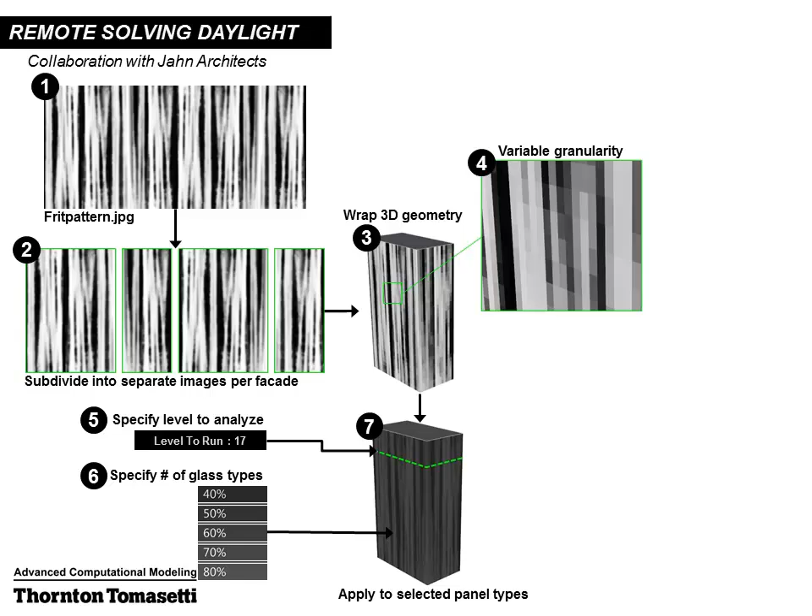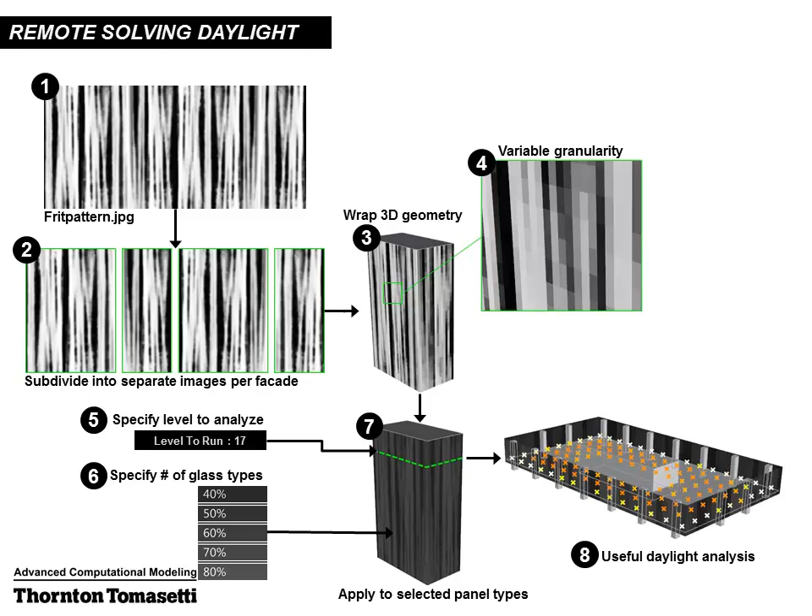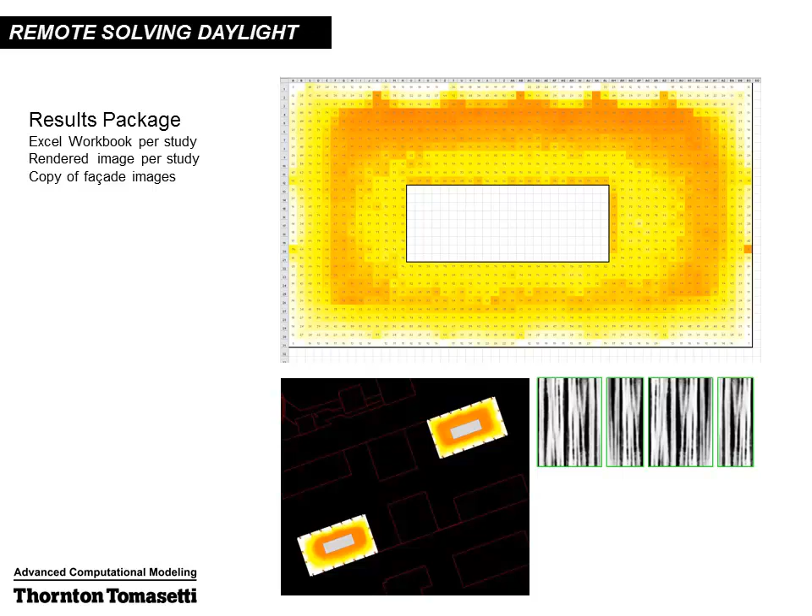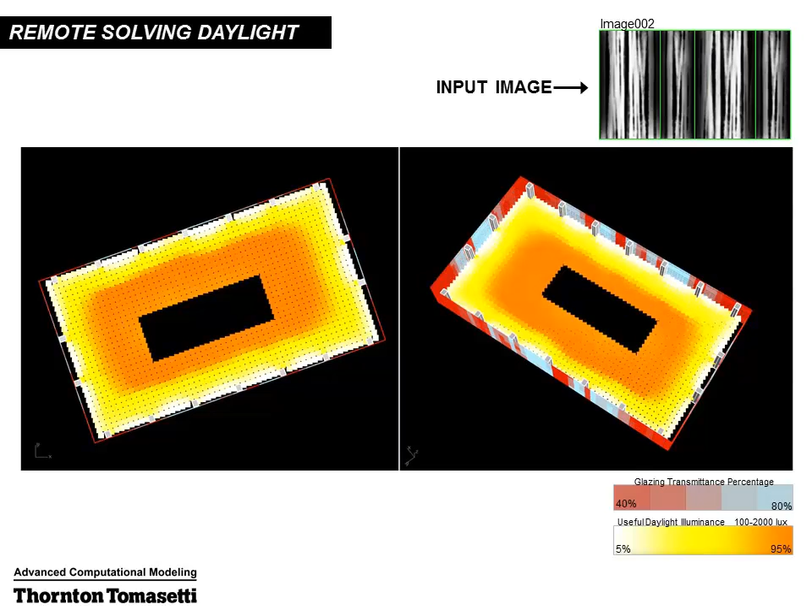The cool part is, because we have the building skin group, they can take care of it and come up with ideas to make sure the image we produce and the analysis we run for daylighting is really good for construction too. So we don't end up coming to the designers and saying, this is optimized for daylighting, but sorry, you can't make it because it's 200 different panels. So everything can go at the same time, and we make sure that at the end we get results that not only look good, but are something we can go for construction.

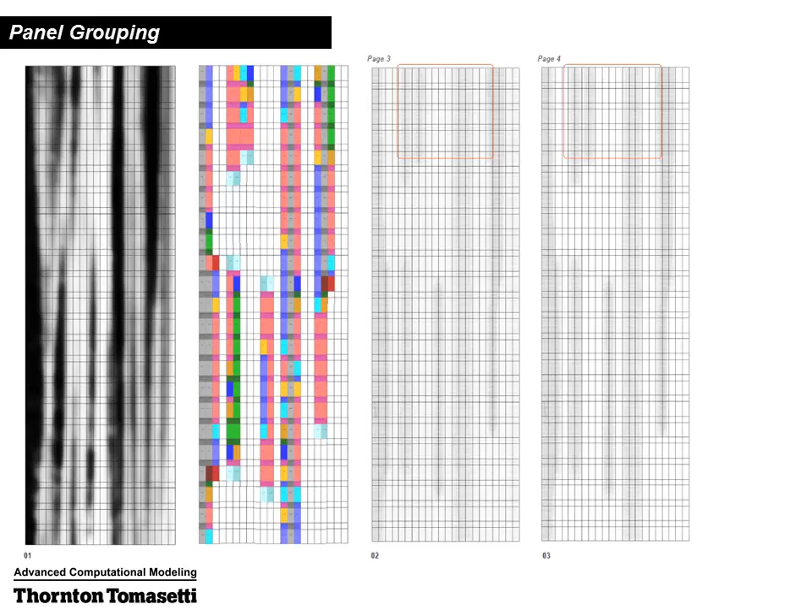Yeah, these are different iterations and all this stuff.

What is the focus in 2014? Should we go for it? Yeah, so now it's 2014.

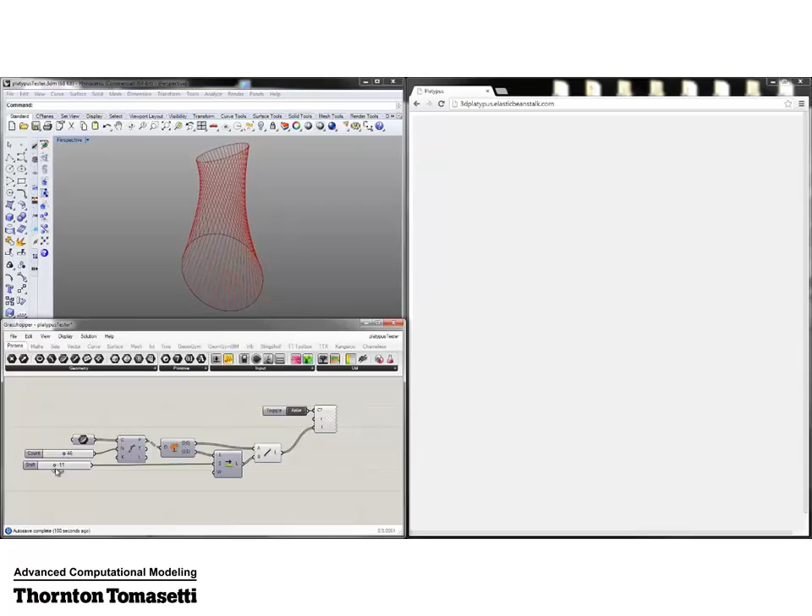So now for us, kind of going on from that Dropbox kind of stuff, we want to get a lot more into web-based collaboration. We posted this video on Friday, and we already had like 500 views in the Grasshopper forum. This is something we just started developing, the idea that we can have a live collaboration platform in a web browser, so you can imagine multiple people streaming their geometry into the same browser environment and comparing notes very dynamically.

So this is a tool that is called Platypus. It's going to be released eventually, I don't know yet when. Soon, I think.

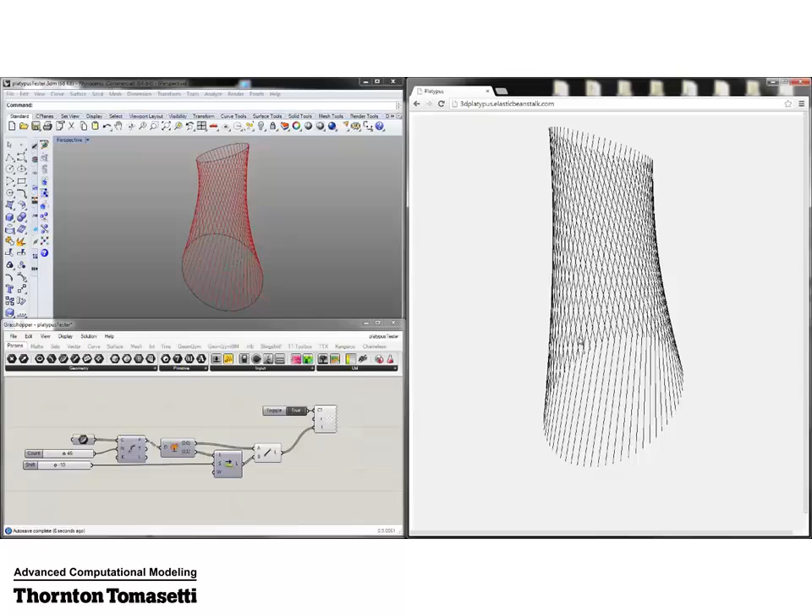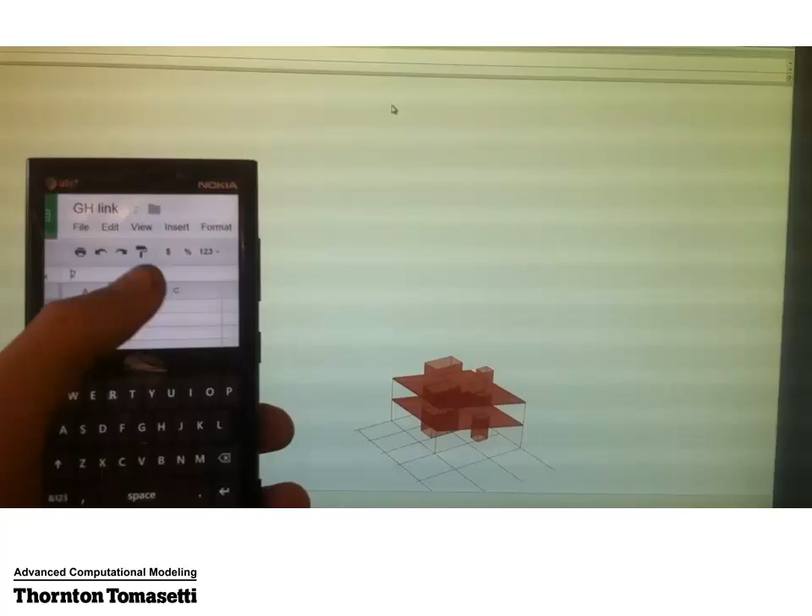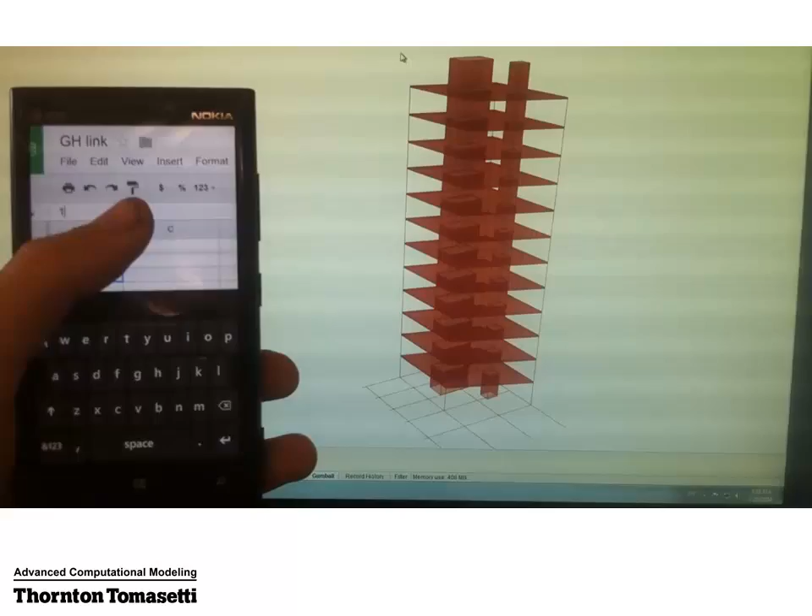Also, maybe two days ago we updated our TT Toolbox plugin for Grasshopper, and we now include a link with Google Spreadsheets. It's a small step, but we're really interested in providing more infrastructure around web-based technologies, and just seeing where that leads us.

Also on that note, last year we had our first AEC Technology Symposium, last May. It was a pretty big event. We started wanting it to be just a computational gathering, but all of a sudden it became a 2-day conference by the time we were done planning it. Now it's an annual thing, taking place again on May 16th, a full day of mainly practice-based, not so much academic, presentations around these ideas.

We want to focus on web specifically. Then on the weekend, the 17th and 18th, we'll host a hackathon where we'll have access to all these tools, and we want people to come with their own tools and see what we can develop together.

With that in mind, we're trying to do something different with the hackathon. A hackathon is usually for computer science people—they come together and start hacking an issue. Like, this weekend let's hack all the data you can find for transit in New York and come up with an idea. Let's see if we can come up with an app that helps people find the right bicycle at the right time in New York. You need that, and all that stuff.

But what we're usually missing in the building industry is that not everybody can code, and we know that. Maybe you have knowledge in Grasshopper, a little bit of scripting—the idea is we'll have leaders for the hackathon to help you. It's not going to be about writing lines of code or syntax. You come up with the idea, and we'll support it so it really happens if you have the mentality of computational design. We hope that by the end of 2 days we get something out of it.